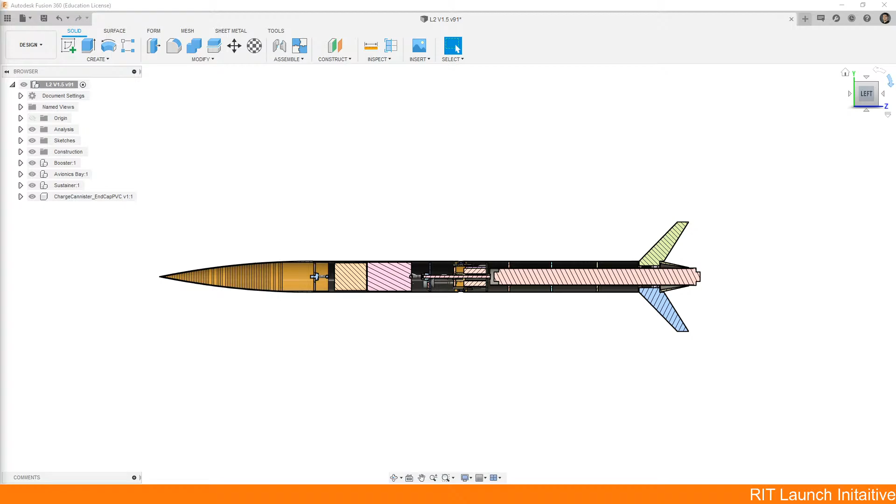So to start with, let's do a quick review of what this rocket is. Lightwave 1 was a single deploy Level 2 rocket that would fly to 12,000 feet to test out new experimental live stream camera systems for the team. Since the live stream cameras are the main focus of this rocket, there's a very large avionics bay in the center, and a lot of design practices had to go into getting it to work properly.

So if we go back to the section analysis view, let's work through each section of the rocket one at a time, starting with the nose cone.

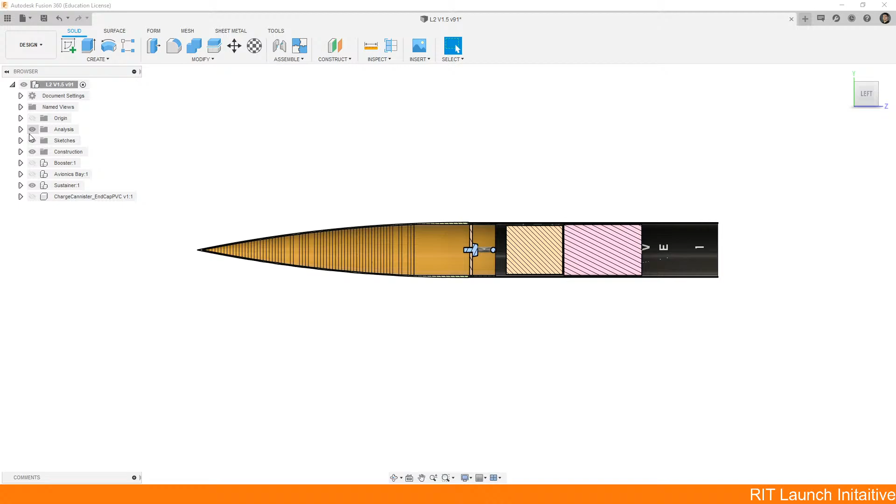The nose cone itself is not something I designed. This was an off-the-shelf part, and I only had to replicate it here in Fusion. If you didn't know, you can export nose cone geometry as a PDF or SVG from OpenRocket to then import into Fusion. That's why you can see this nose cone is made up of a series of small interconnected straight lines revolved around a central axis. This is not ideal for actual manufacturing. If you were to actually manufacture it, you'd want to do a fit point spline along all these points in the imported SVG, but as a visual representation and for renders and animations, it's more than good enough.

So let's go ahead and hide that nose cone. Inside the nose cone I had a bulkhead, an eye bolt, and a nut. This is a common attachment practice — you'll see this in pretty much every rocket's nose cone that doesn't have a solid sealed bottom.

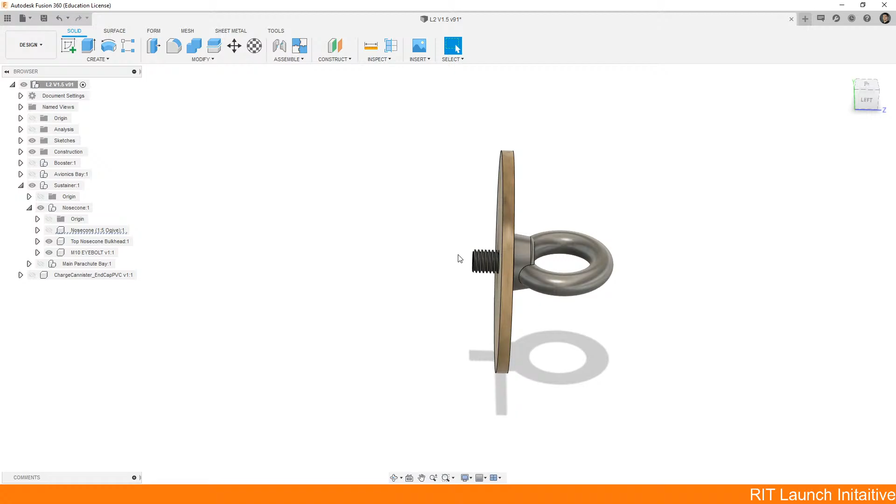This technique of just putting a floating bulkhead in is a lot harder than CAD makes it out to be. If we turn back on the nose cone and the section analysis, you can see there's not much actually stopping this bulkhead from moving backwards in the nose cone. So when I went to glue this up, if the fit and dimension weren't perfect, what ended up happening is this bulkhead would either sink back another few inches into the nose cone until it hit the taper, or it would bend and deflect and not be straight up and down, which can lead to unequal loading during deployment forces.

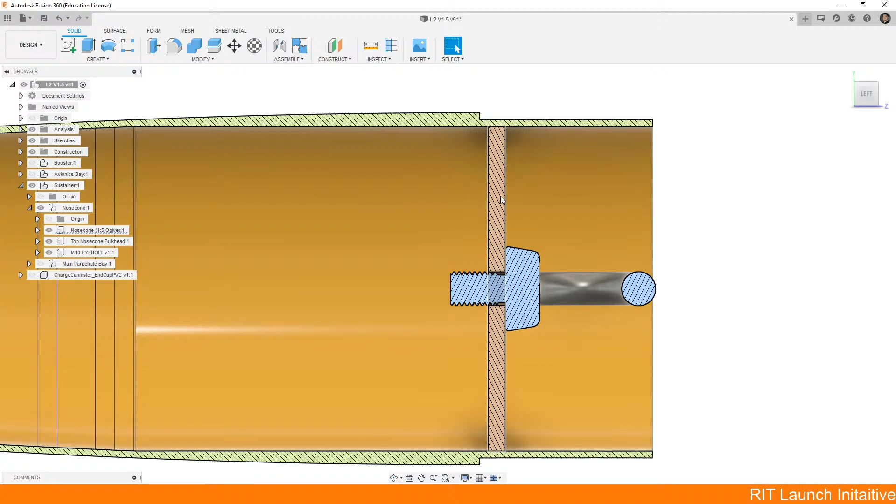So if I were to remake this, I'd probably make this a much thicker part, maybe out of a 3D printed material, that gives me a much larger cross section so it's less likely to bend or bow. I'd also like to potentially add some sort of locating edge on it, so maybe in the future I'd move this entire bulkhead up 4 to 5 inches into the nose cone so I can use the natural taper of the nose cone to locate that bulkhead.

The other downside of this design is that I permanently glued this bulkhead in place, so I'm not able to put any counterweights or future payloads inside of the nose cone if I wanted to.

The eye bolt and the nut, which is not modeled here, are just commercial off-the-shelf parts. There's nothing really special or interesting about those.

One thing I would change, not about the design itself, but how I would assemble it, is I would attach the eye bolt and nut to the bulkhead and secure that with epoxy before moving the entire bulkhead into place. I had just put them together with normal friction, like you'd normally attach a bolt and nut, before installing the bulkhead. So I had to inject epoxy in and around the eye bolt to get it solidly secured. Again, if it was a removable bulkhead, that would have solved that issue as well.

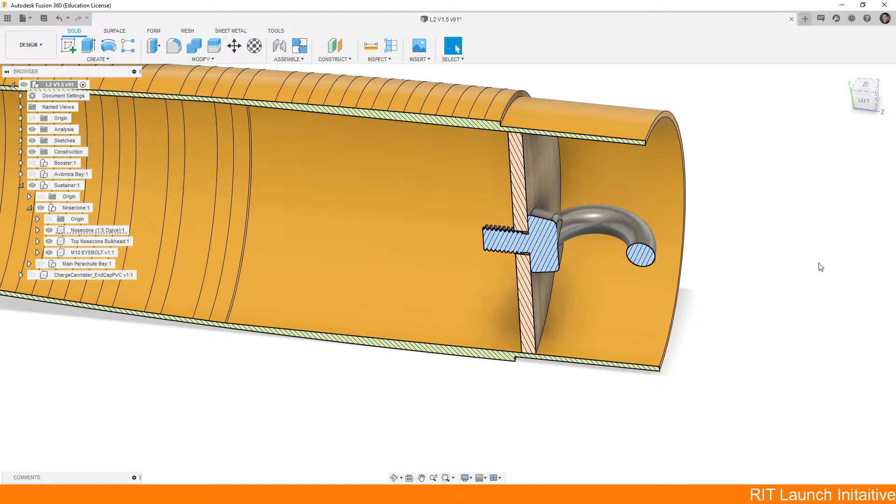Now we can move on to the parachute bay. There's really not much to say about this. It's an off-the-shelf tube with 2 parachutes in it. From a manufacturing and assembly standpoint, it can't get much simpler than that, so I think we're all set there.

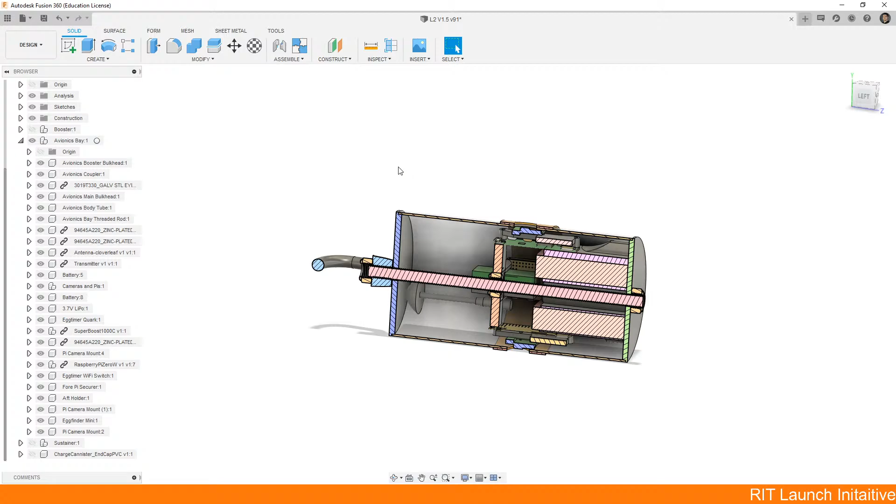One thing you'll notice is there's no connection mechanism to hold this to the parachute bay or the booster below. I ended up just drilling 4 bolt holes through it at random once I put it all together, which in hindsight, now I don't know exactly where those holes are in CAD when I want to remake parts, and the holes aren't at a perfect spacing, so I can't just rely on some pattern and rotate around them. In the future, I'd probably want to design and machine out those holes using CAD rather than just freehanding them.

To give you an example, now I don't necessarily know if something like this part of the avionics housing, which comes very close to the coupler tube, will fit, since in the real rocket there might be a bolt and a nut there.

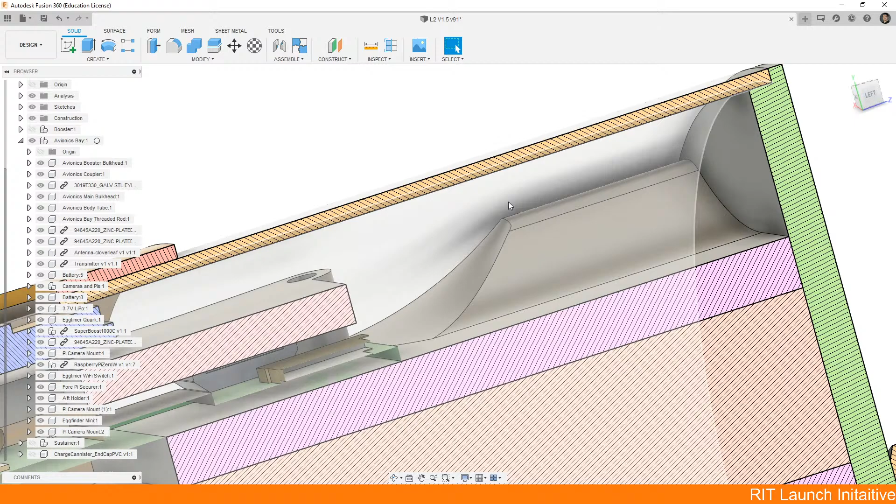For retaining the bolts, I originally had just threaded them through the body tube, but I found that actually 3D printing a block and then putting a nut in the back of that block works best. You can see an example of a similar design right here.

Normally what you'd do is just put a nut against the inside surface of the tube and epoxy it there. The thing is, that doesn't get it to sit perfectly flat, so it's better to 3D print a small block like this that has the curve of the inside of the body tube or nose cone already made into it, and then just a recess that will hold the nut in place. This also gives you a better contact area when gluing down the part, and can make manufacturing and assembly a lot easier.

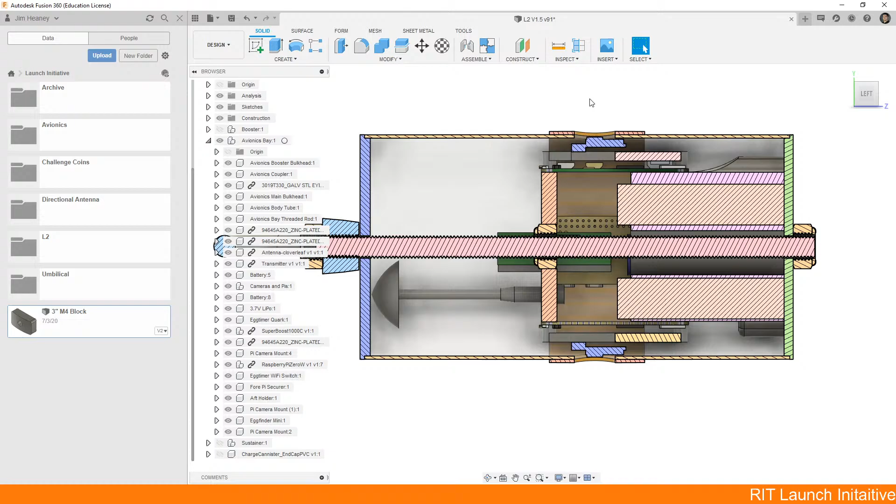Moving back to the Avionics Bay, currently it's configured for a payload of 4 Raspberry Pi cameras, one of which is live streaming over a 1-watt antenna. It also has an Eggtimer Quark for its deployment, and we can't see it in this view, but there's also an Eggtimer tracker, or Eggfinder I believe it's called, and an Eggtimer Wi-Fi arming switch to turn on and off the Avionics Bay.

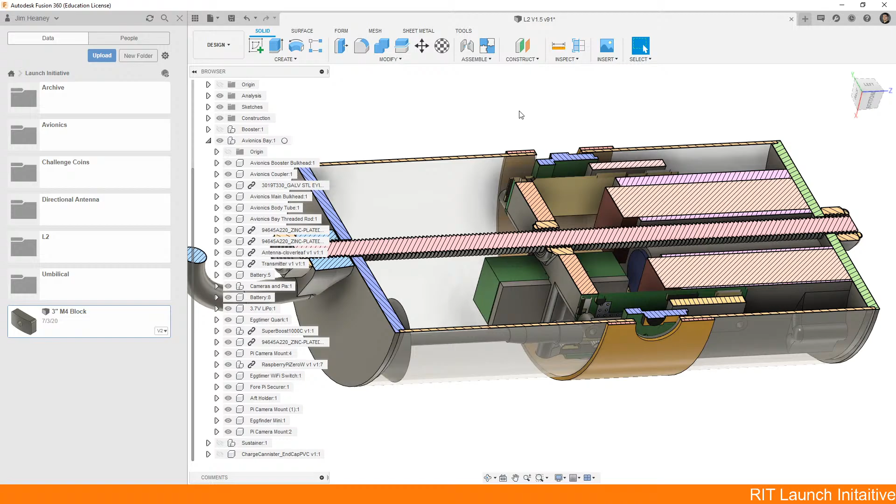These cameras and radio systems take a lot of power, and since the rocket would be flying so high and far, there was a concern over the batteries dying mid-flight or when downrange, causing us to lose tracking. So you can see there's quite a few batteries in here. We have 2 very large 2S batteries and 1 traditional 18650 3.7 volt LiPo.

Batteries are something a bit tricky with rocketry, because ideally 1 large battery is better than multiple small batteries from a cost and density standpoint. The challenge is you can't really run everything off 1 single battery. So for example, with this setup, I had the avionics and tracker running off 1 2S battery and the transmitter for the video running off the other. If I had combined both into 1 battery, there would be a concern that if the transmitter was drawing more power than expected, I wouldn't be able to find the rocket because it would completely drain the power that should have been used for the tracker and radio system for telemetry.

The downside to multiple batteries is they're a lot harder to place in three-dimensional space and take up a lot of room if you're using a traditional 2D sled for your Avionics Bay. I tried experimenting with a three-dimensional sled where parts are held in 3D space at different points with this Avionics Bay, but ultimately I wouldn't recommend it for something like this.

Our first problem with this Avionics Bay, now that I've gone through the whole design process and tried to squeeze all these parts in there, is that this is way too much stuff. If you look in CAD, everything looks like it fits nice and snug. You've got plenty of gaps between parts, there's spacers, nothing touching the threaded rod, it's all great. The challenge is you sort of lose a sense of scale when you're designing.

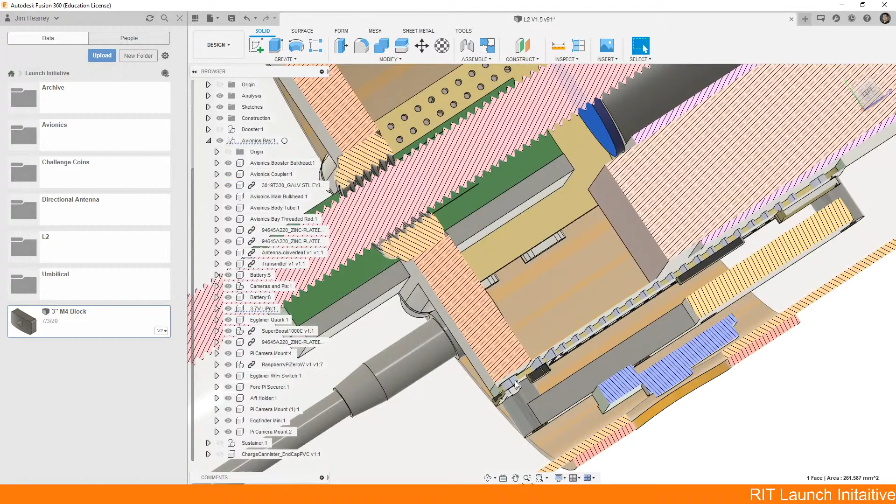These spacers look great and all, until you realize they're only about 0.5 millimeters. So now you're dealing with very small parts, you have to go in there with tweezers, you have bolts that are insanely tiny, and getting dimensions for the bolt holes with a 3D printed floating sled like this is very difficult.

So really the first thing we should have done is not have this many parts in there. That comes into the DFA aspect of this. You really need to know what parts you need for the mission and then design the rocket around it, or know the constraints of your rocket and design the mission around that. For this size of Avionics Bay, since it's already built and I can't modify it, I'd probably want to reduce the scope down from 4 cameras to 1, and maybe decrease the size of the transmitter for the video from 1 watt to 600 milliwatts.

Cutting the power of the radio also significantly decreases the size and complexity of including the radio in the rocket. The downside, of course, is that we wouldn't have 360 video from this rocket, and the video feed would get cut off sooner, whereas this one might be able to survive up to apogee and get a good amount of the descent. We might lose a 600 milliwatt signal about 5,000 to 7,000 feet up, and then regain it on the descent.

If I wanted to focus on getting the 360 video and didn't care about the live stream, taking out the antenna and radio transmitter and replacing these Raspberry Pi cameras with a commercial off-the-shelf small camera like an SQ12 would make this entire assembly a lot easier. The Pi cams, while fairly cheap, are extremely delicate. There's a very thin ribbon cable that can only be connected and disconnected a finite number of times between the camera module and the Pi. So if you need to modify things or move things around too much, you end up breaking stuff. It's better to use a self-contained module and pay the few extra dollars than have multiple broken systems.

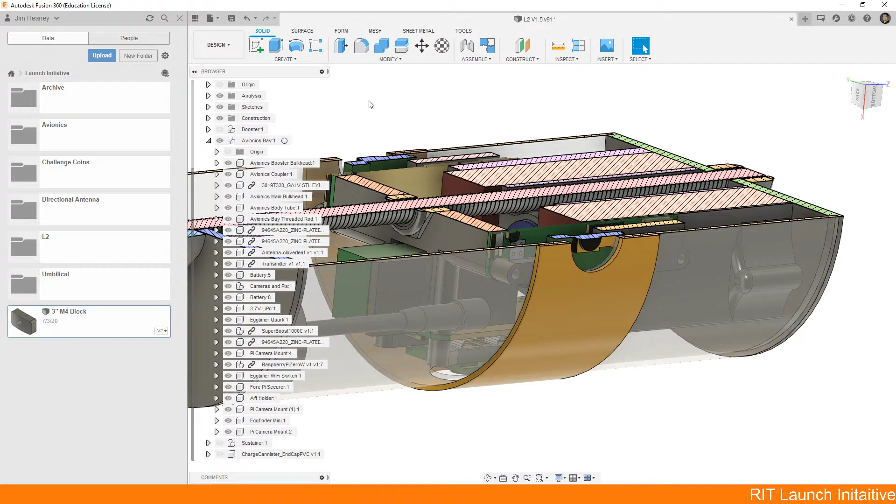So I would start, if we were going to retool this rocket, by getting rid of the antenna. Let's turn off the analysis so we can see everything we're doing. I'd get rid of that live stream antenna — it's just not worth it, we can't fit it in this rocket. Let's focus instead on getting that 360 video.

The Eggtimer Quark, we obviously need that, can't get rid of that. This sled was designed to be 3D printed and would hold the top of the Pis, which we won't need anyway. But let's isolate that part and take a look at the design and what could be improved on it if we wanted to use it again.

So this part was to be 3D printed. What's good about it is I used the fact that there was a threaded rod running through the entire length of the Avionics Bay to retain this part of the sled by just securing a thread lock nut, or nylock nut, in the center of this sled. I was able to constrain this piece in all 3 axes.

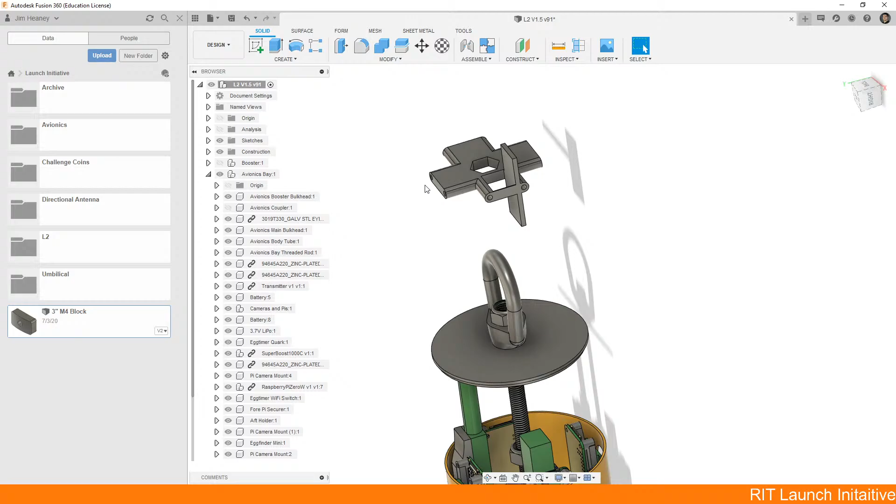The downside with constraining things on a threaded rod, especially with multiple components like this half of the sled and the other half, is that you need to be careful of the thread alignment, or make all the parts locate concentrically. In this case, this hole here, here, here, here, all the way around needed to exactly match up with holes on the Pis, which are also retained by the lower sled.

But since I didn't take into account the thread pitch and the distance between the nuts that would work properly, those holes never quite lined up, and I ended up having to shift this entire sled up and down on its nut. You could also get around this by just making a single piece sled and having multiple nuts underneath it to support it.

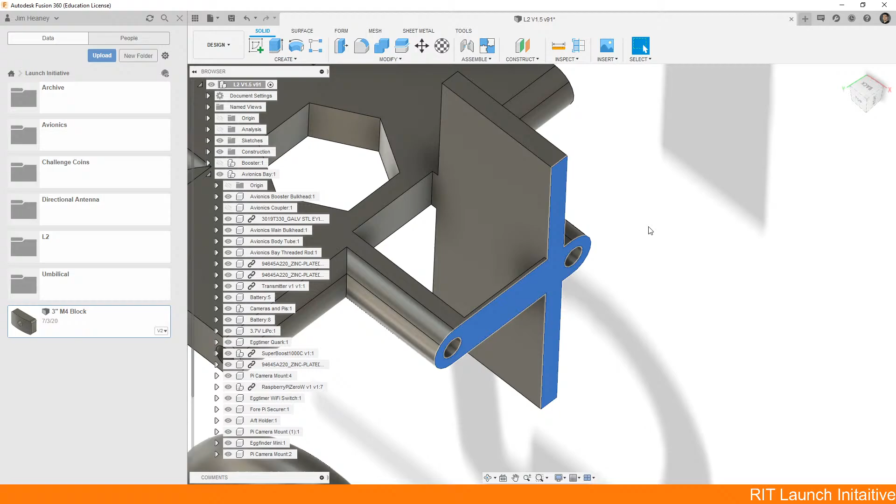Matt in the chat mentioned another challenge: the actual orientation of printing this part. This part was definitely not optimized for 3D printing. There's no great way to position it. You have this very thin feature perpendicular to another thin feature, perpendicular to a bunch of bolt holes that, if printed anything except straight up and down, won't be an accurate size and your bolts won't fit.

Something like this, if you needed this approach, could probably be done easier in 2 to 3 parts—whether laser cutting this part and printing the rest, or printing it in multiple parts that come together around the hex nut in the center. But for now, we're just going to get rid of that altogether.

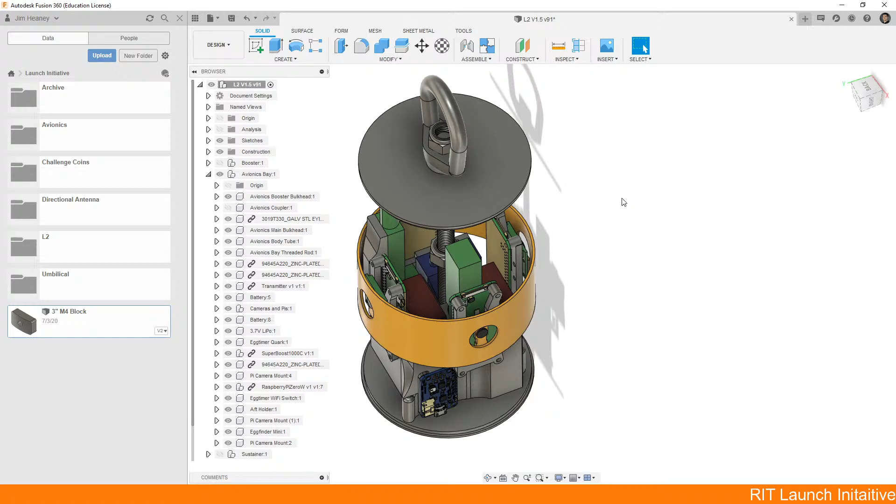The SQ12s I mentioned earlier, what's nice about them compared to the Pis is that they're a smaller cube, easier to retain no matter where you are. Let's keep going and see what else is wrong with this.

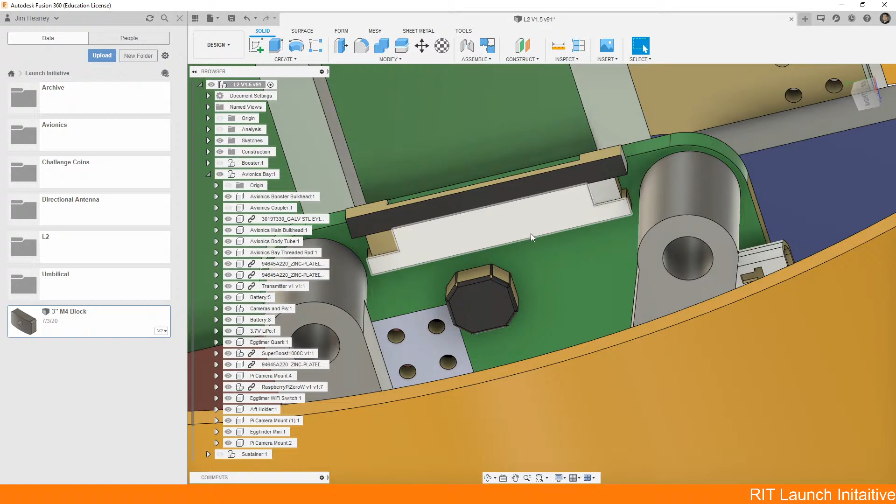You'll notice some components, like the Raspberry Pis, are a lot more detailed than the Quark and the Egg Finder. Some components have commercially available or free-to-use CAD models that are very accurate, which helps a lot with DFA. With these Raspberry Pis, I was able to design parts that come in very close to the connectors and physical parts on the boards to ensure everything fits properly. Of course, you need to worry about the accuracy and dimensioning of these CAD models when you find them, but if available, it makes the DFA process a lot easier.

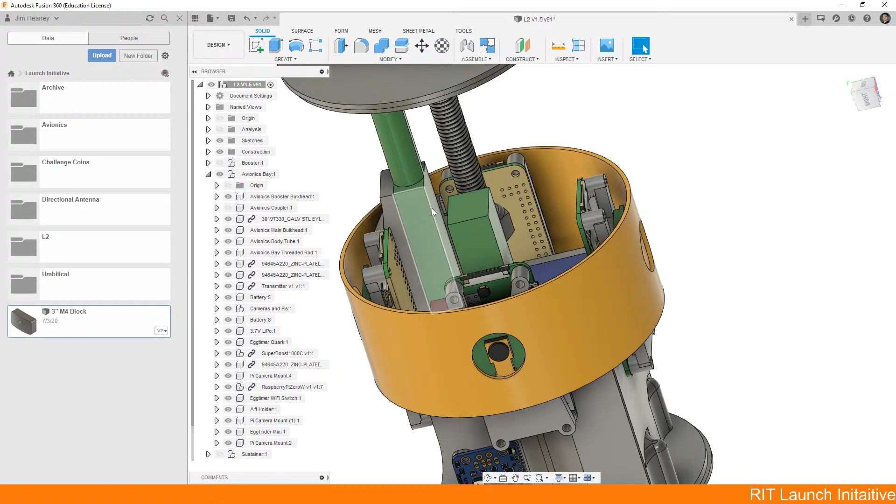The Quarks and Egg Finders, on the other hand, don't have any commercially available dimensions or CAD models. Instead, you either design them yourself, which takes a lot of time, or use this bounding box or black box approach, where you make a basic shape covering where the part would sit in general. Maybe there's extra space, maybe it's not totally indicative of the final shape, but you know that if no parts go into this box, that part will fit in here.

The downside of these is that there's no mounting. So if we look at the Egg Finder's box, all it is, is a solid cube. The Egg Finder itself does have bolt holes on it, but there's no way to locate those bolt holes in CAD.

As a workaround, I thought I could just hot glue these down to the sled underneath and wrap a zip tie around them, which might have worked with some other systems, but the Egg Finder and Egg Timer products use voltage regulators that run very hot. You need to take that into consideration when designing parts around them. Of course, it never says that anywhere in the documentation, so it's something you need to find out experimentally by testing your parts before implementing them.

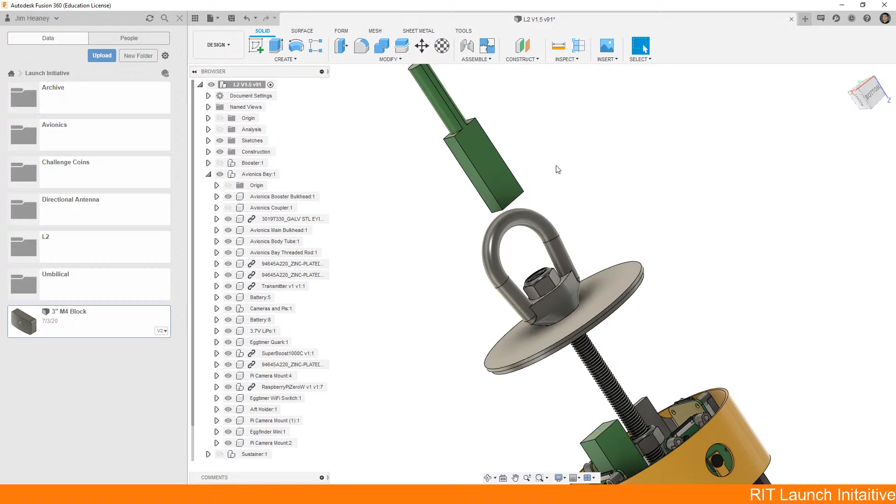If I were to do this again, I'd probably go through and make a couple revisions to the sled to figure out the hole positions on the Egg Finder and Egg Timer. Another approach you could take is to print a solid blank slab underneath this component, and once you have the part aligned how you want, drill the holes through and mark them in real life. This is also a good approach for custom components where you don't necessarily know the exact dimensions. So we're definitely going to keep the Egg Finder in there.

Let's hide this top bulkhead and everything, and we'll hide the external body tube.

So like we said, we don't want Pis anymore—let's just get rid of all of them. Since they're such complex models, it's going to take a while for all of this to process. And this one does not want to disappear. There we go. So let's see what we're left with.

Down here we have the power boost. This was used to convert the 3.7 volts from the LiPo up to the 5 volts that the Pis needed to run. Power boost is a simple, commercially available option for converting power.

Thing is, a lot of avionics already have a built-in voltage regulator we could just tap off of, and this board is a lot bigger and more complex than the actual voltage regulator itself. We could get a commercially available step-down voltage regulator that would take up probably one-eighth the size and cost about one-tenth the price. The advantage to these Adafruit breakout boards is that they do have very accurate CAD models with mounting.

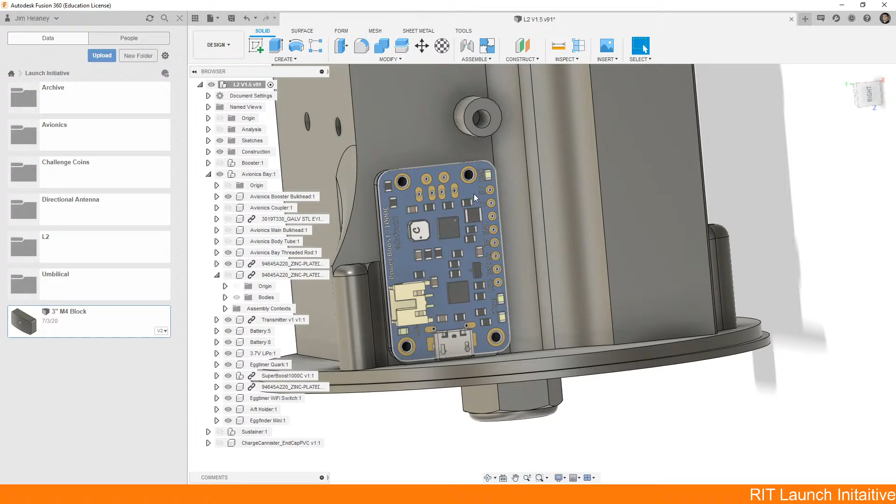So if you're doing something very complex with multiple boards, sometimes these are beneficial. For what we're doing though, we really want to save money where possible and simplify the assembly process, so we're going to get rid of that.

Now with those other cheaper alternatives for voltage regulation that I mentioned, we run into the same problem that we did with the egg timer products: there is no easy and accurate dimensioning, especially for mounting holes, if there's even mounting holes on the parts themselves. Many of them are just designed to either be mounted inside of a PCB or floating free in space. So we need to come up with some mounting practices for those.

A common one is glue or epoxy, preferably not hot glue since voltage regulators can get very hot. But it is an approach you can use for something with very low power consumption. Another approach I've seen is people will sometimes wrap them in two axes with zip ties, and that's a happy medium between the two approaches since they are temperature resistant, reversible, and don't necessarily require accurate dimensions on your part. You just need to generally know the length, width, and height of it.

Now that we've gotten rid of the recording systems, we can get rid of two of the batteries and the transmitter for the video.

Another advantage to using these SQ12s that'll help to further simplify the DFA process is that they are completely self-contained units. So we don't need an external memory card, we don't need an external battery, we don't need an external power connection. You just hit the button on the top and they work.

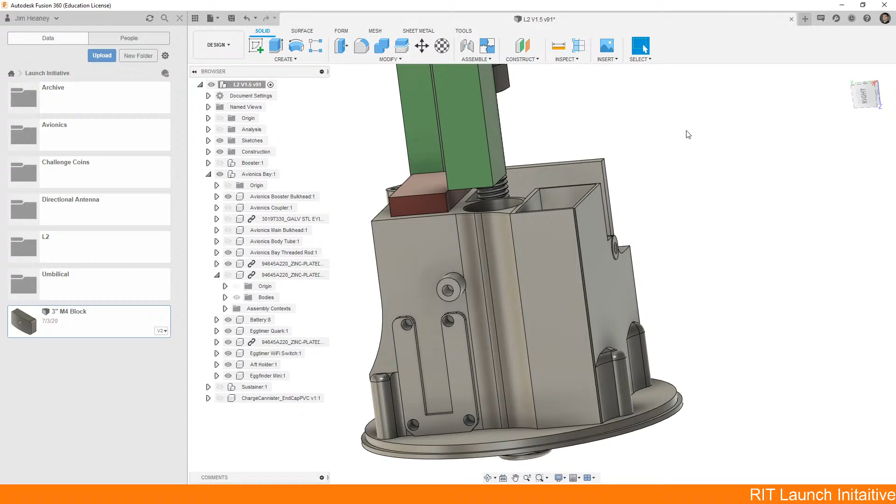Using those four pre-assembled camera units would simplify our launch operations procedures since we now only need to worry about one battery instead of two to three.

So now we can get rid of this mess of a sled, but first let's pull it out and take a look at the design practices for it.

This is another example of a part that was designed to be 3D printed, but it's not great. See, 3D printing is a bit of a double-edged sword when it comes to DFM, in that 3D printing can make pretty much any geometry and it won't complain. If I give square corners to a mill, it won't work. But if I give them to a printer, it will do it. It might not be as good as I want, but it'll definitely do it. That though sort of lulls designers into a false sense of security that anything they can make in CAD can be 3D printed, which is not always the case.

You need to give special considerations for support material, hole sizing, and other things like inserts. So inserts are a great piece of technology for DFM that I used on this part that I should have used on that other one we saw earlier.

When you're trying to thread a bolt into a 3D printed part, unless it's a very large diameter bolt, like over one inch, you can't accurately model the threads. So what most people do is they undersize the hole slightly, and the first time they drive in the bolt, they do it with a very high torque Allen key. What this will do is the bolt will actually cut the threads into the inside of the plastic. This is an okay approach for some applications, but the issue is it requires a lot of material around the bolt hole that needs to be very well reinforced to take those cutting forces.

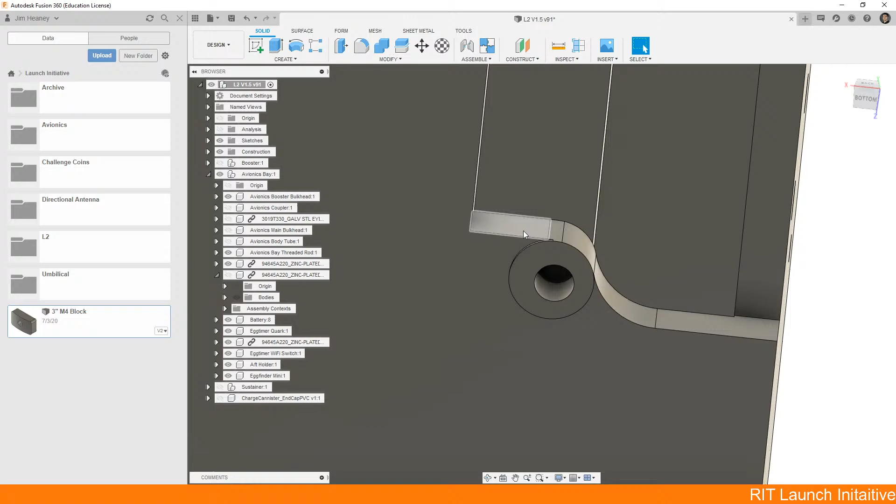There's also the concern that if you have a hole that's too close to the edge, like this one, when you're using a threaded insert, the heat will deform the shape out here permanently, and the threaded insert won't be in there straight.

But if you take all those into consideration, threaded inserts are really a great way to make your 3D printed parts work a lot better. They're just as strong, if not stronger, than the surrounding plastic when it comes to thread strength. It gives you a much easier approach that's nicer to use than trying to force the threads in yourself.

So let's take a look at some other aspects of this. One of the good things about this part is if we move it away from the rocket, you'll be able to see it better. The part is more or less a 2D profile, so when we print it, all of these walls are going to come straight up out of the bed, so they won't require much support material.

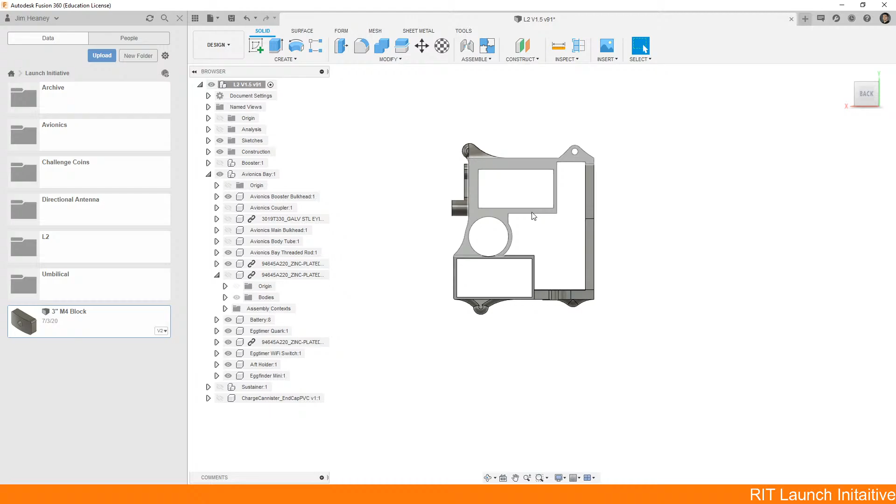Also, when the printer is moving just in the XY space with no support material, you'll generally find that your dimensions are going to be more accurate to what they are in reality. Of course, they're not really accurate.

If we had to get a snug fit on a battery, for instance, this is where the 2S LiPos would fit—you can see I modeled the rectangle to be 35 millimeters across. The LiPos in reality are about 30 to 32 millimeters across, but to make up for the dimensional inaccuracies of the 3D printer, I oversized the holes.

There's no set rules when it comes to DFM for oversizing dimensions for 3D printed parts, since every 3D printer will have a slightly different performance profile for how well it can handle accurate geometry. It's best to be familiar with the machines you're using and then design based on a couple of tests you can do.

When I'm designing to use a new 3D printer, one thing I like to do is just set up a block with a bunch of pins in it, with varying distances between the walls of the pins and the pins themselves. This allows me to very quickly and easily get a feel for how accurate the 3D printer will be when it comes to tight tolerances.

For this application, I was 3D printing the parts on just a cheap self-built 3D printer, so everything was awful when it came to dimensioning.

This is one of the downsides to 3D printing from a dimensioning standpoint for DFM. When you go to have a part manufactured for milling or something, you don't need to worry about compensating for the accuracy of the machine or the dimensioning or anything like that. All of that is handled inside of CAM or the machine's cutter compensation itself.

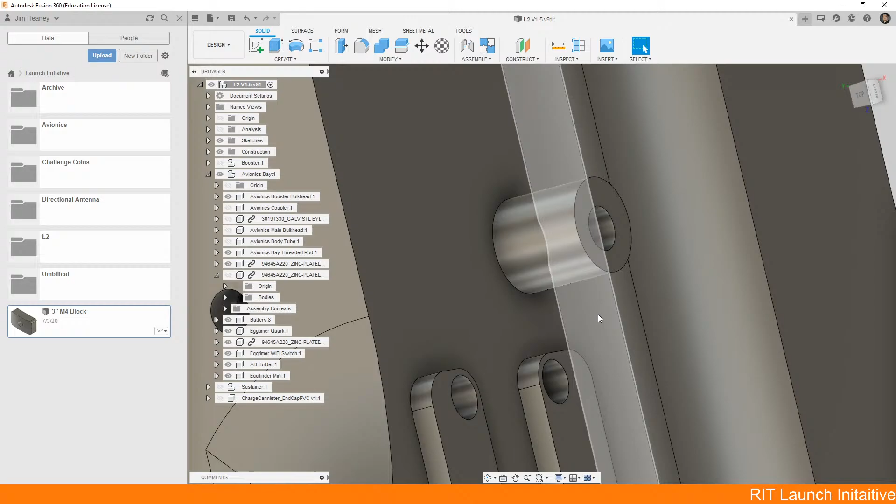3D printers, when they have free-floating geometry that doesn't have anything immediately below it, need to use support material. Now, support material is not necessarily bad. It will reduce the dimensional accuracy of the part it is directly supporting, but overall, it's not the end of the world. Something like this, though, is a bit of an issue.

If we look head-on at a cylinder that it had to support, the 3D printer does its support by drawing a series of lines up to the feature it needs to support. So we were supporting a rectangle, like this surface up here. Let's say there was another part up top—it could just draw a series of lines, and that would allow it to bridge the gap between them.

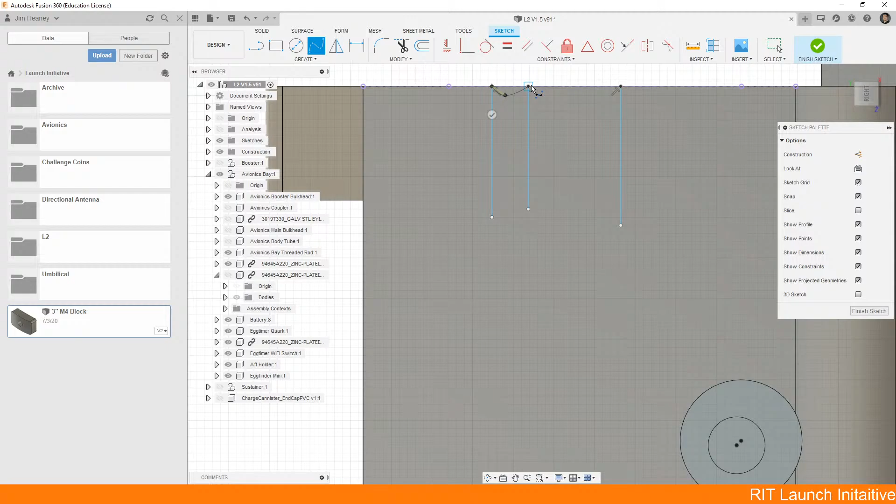So we might see maybe a little bit of drooping in the part. This is massively exaggerated, but overall it does pretty closely fit what you would expect from a flat part. Maybe touch it with a little bit of sandpaper and you'll be fine.

Now when we look at a part that has a curved bottom facing down towards the build plate, the support material will touch there, like we expect it to. And then it'll do one there, yep.

And it will do one maybe here, like that. Now the issue with this is it's only supporting the circle on an infinitely small point of material right there, and then it has all of this arc that it needs to build up in midair before reaching this next part. Not only are we now working against gravity, but the natural constrictive properties of plastic as they cool will cause that edge to curl up.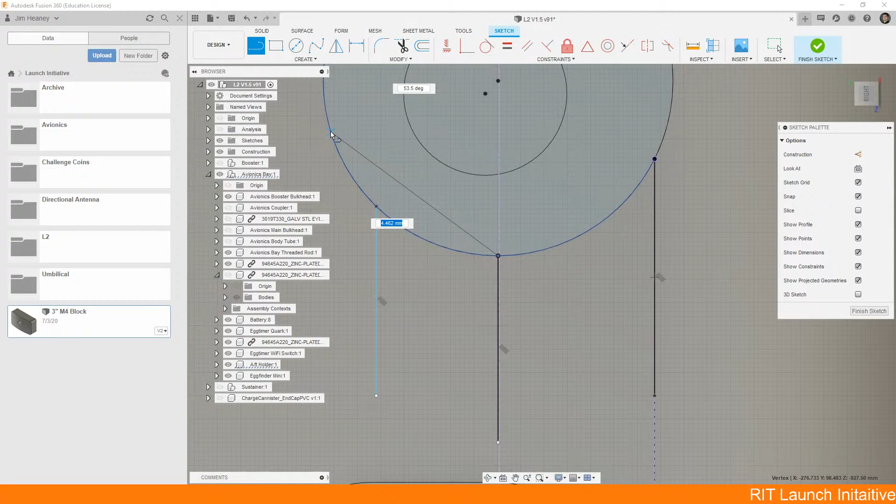So what may end up happening is this will be closer to just a rough edge, and the material that would have been here starts to get pushed up, and we'll start to see flats on the inside of the hole above it. So when you're designing parts that need to be supported, it's best to give them a very flat, broad base rather than a curve like this. I don't even really know why I went for a curve here. I think it's just because this was a standoff for a bolt, and I thought the bolt is round, so I'll make the standoff round.

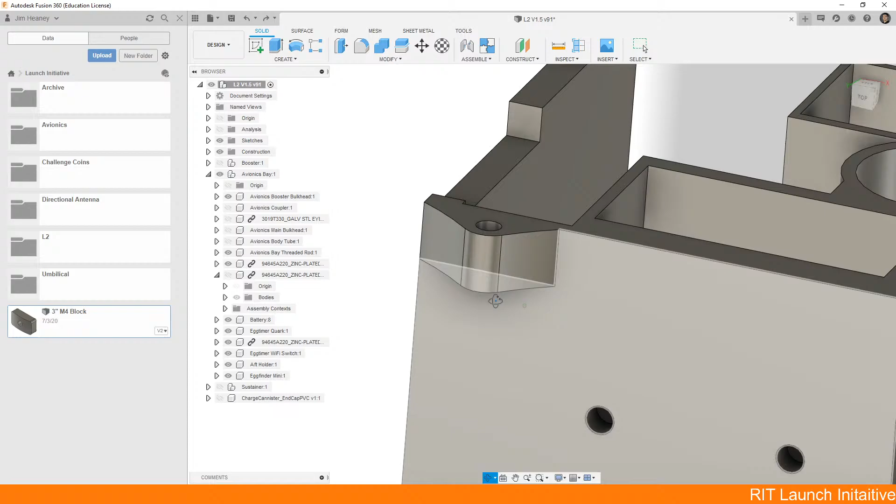So over here, this feature would be much better supported during the printing process. You'd see that it's very flat along the bottom, so when it goes to support it, we'll have much less deflection. Also, there's no critical geometry in line with the support material. This hole here, its dimensional accuracy won't be bothered much by any plastic that starts to warp or bend on either side of it.

So going around again, you can see the good. It's a very simple 2D profile. Where we need support material, it's a clean cutaway with a large flat base for supporting. The part has a lot of contact area with the base of the printer, which is good for helping it to stop from curling up.

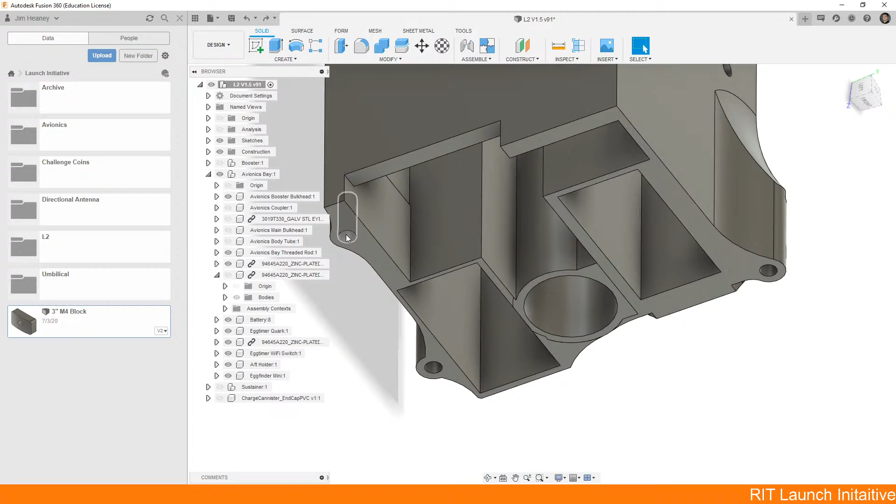These holes on the bottom, depending on which machine you use, might be a bit tricky. 3D printers is a bit of a crapshoot. About half of them, the features that are on the bed are the most accurate and best features of the print, like with a Prusa i3. But for other printers, like a FlashForge, the features immediately on the bed are the least accurate and the worst made of everything else on the part. So again, it really comes down to knowing what tools you're using when you're doing your DFM.

So this part, overall, it could use some improvement, but I would still print this and run it as is today with no major concerns. But we're simplifying, so let's get rid of it. Now, another part to look at that we're not going to change, but it's a good change of pace to go from 3D printing now to traditional machining.

Let's take a look at these bulkheads. So since there's going to be charge caps mounted immediately above and below, just above the Avionics Bay, we wanted them to be metal. You could probably get away with a very thick wood with a metal sheet coating on top, but I had aluminum plate stock, so I figured why not.

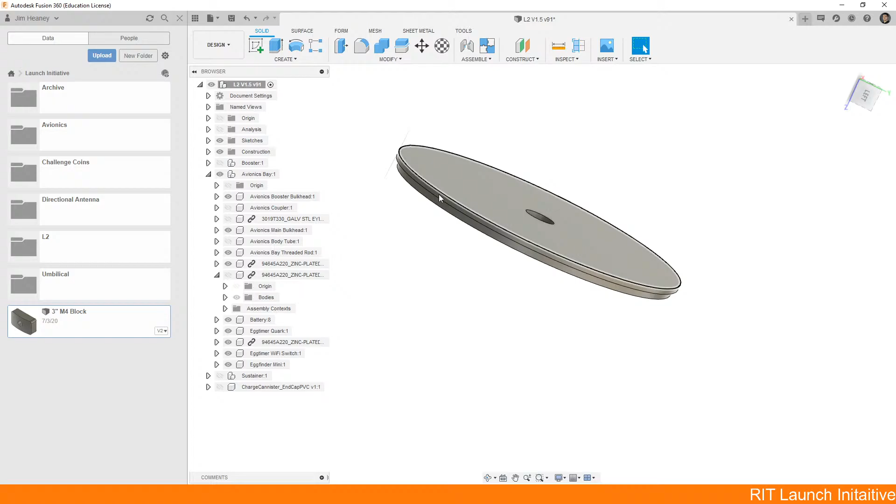The blanks were very easy to cut in the water jet on campus, since it's a very large, simple radius on the outside, and the inside diameter is very large as well. The water jet is like a laser cutter, but it can cut through metal or pretty much anything else. The downside is that it can't cut precisely on both sides.

So if I had this circle, which is a diameter of just under 100 millimeters, and I had the plate that it came out of, the plate probably has a hole that's like 120, 130 millimeters in diameter, and the edge is all jaggedy and broke. Same with the inside hole here. If we took the piece of material that was in here, that was cut out, it probably just looks like a random shard of aluminum rather than a clean cutout that you would see with a laser cutter.

So one important thing to note about this is, just to keep everything simple, the thickness of the plate is not the nominal size of the stock. So if I change the document settings from millimeters to inches, we can see that this is 0.186 in CAD. Now that doesn't really match up with any nominal plate thickness.

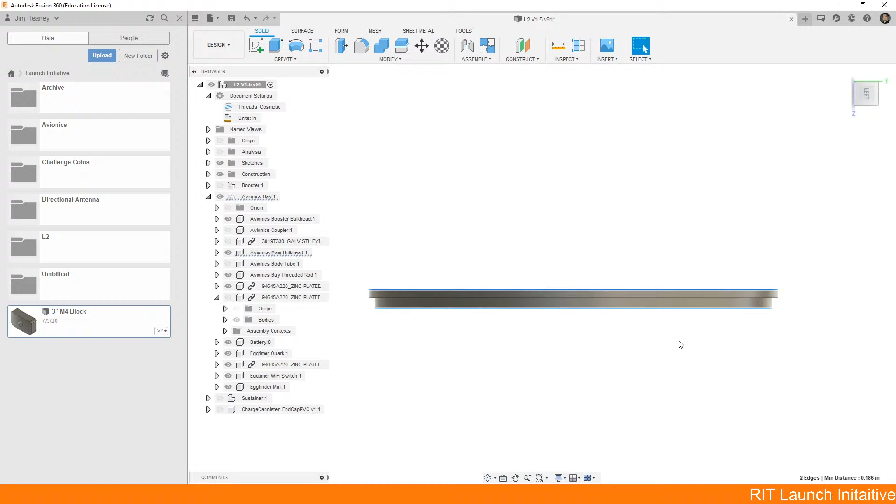It's possible that I found some odd gauge material, but if I remember correctly, what I actually did was I got some quarter-inch aluminum, and then in the dimensions I marked out that only this dimension was critical, from the base of the lip to the top of the lip, and I didn't really care how much material was above the lip, since that's just sitting in the avionics bay, or in the parachute bay anyway.

Just for accuracy's sake, if I was to do this again, I would probably model this to the size that I would want, rather than doing some weird dimensioning on the final print.

Now, speaking of dimensioning, when I designed this, I designed it for a nominal tube. So the nominal tube was this one here, which I said had an internal radius of 1.894, and this part had a radius of 1.894, and I called it out as plus or minus 10 thou.

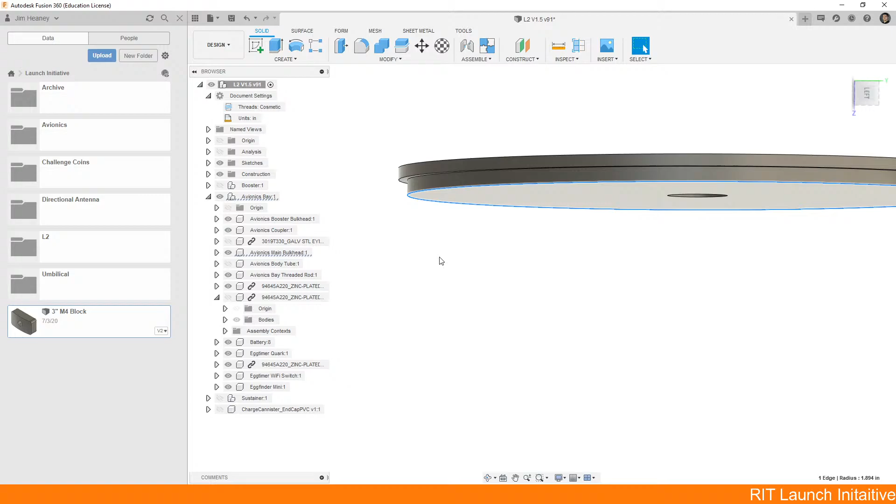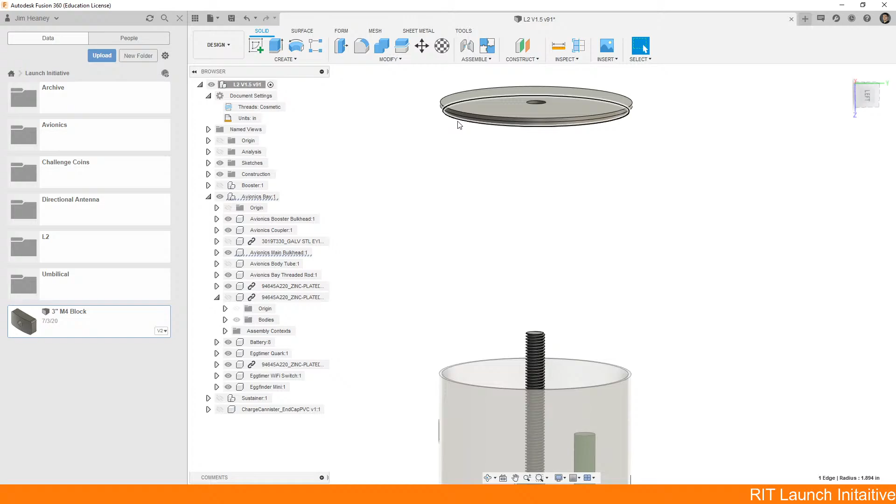Now, there were two main failures there. The first is the tubes themselves have a tolerance of plus or minus about 10 to 20 thou on the inside, depending on where they are in the wrap and which batch they came from. The other issue is that since these parts need to fit together, telling the shop that they can make this part plus 10 thou instead of, say, plus 0 minus 20 meant that they could design this part and machine it to be oversized already.

So when I got this part, it didn't fit, wasn't even close. I could have tried to sand down the inside of the tube, but that would have significantly weakened the structural integrity. So instead what I had to do was put this on a lathe and turn this step down a bit more, as well as this to fit inside the parachute bay.

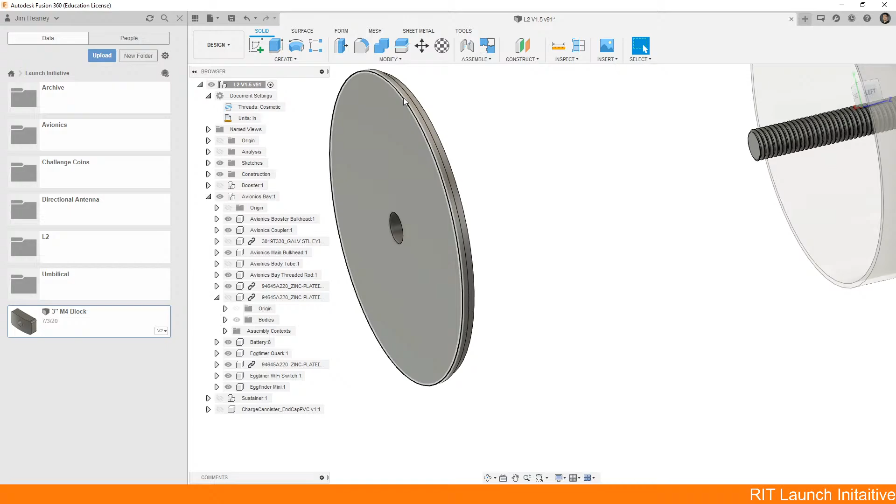The challenge is, how do you hold this part? You have to spin it, there's no identifying marks, this is way too thin to hold on to with a chuck, especially if we needed to machine those features. So I ended up having to squeeze it between two nuts on a piece of all thread that I held in the chuck. This is far from an ideal work holding solution, and it led to a lot of chatter and inaccuracies in these parts.

I eventually did get them to fit, but it was a multi-hour process just trying to shave off that little bit of metal.

If I was to do it again, I would probably want to do a composite bulkhead, where instead of trying to cut this weird step, which would increase the number of machining steps, so we have to go from the water jet to the lathe and then fit check and back to the lathe, what I would instead do is split it into two parts.

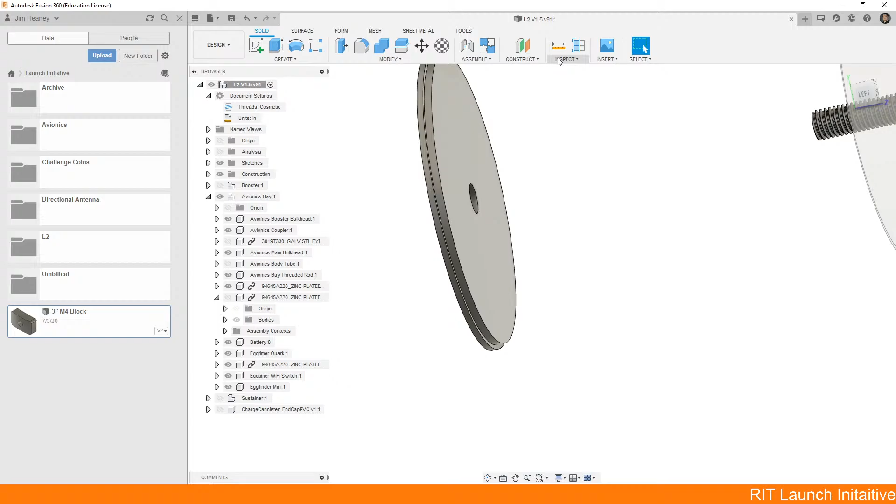So now I can send the shop a thinner piece of stock, and I can tell them I want a circle of this diameter with this hole size, and a circle of this diameter with this hole size. Then I could just bond the two together with some strong epoxy in the middle, and I have functionally the same bulkhead, but with one fewer machining operations, which saves maybe hours or even days off the turnaround time.

And once I did the fit check, so I found something wasn't good, I can get each part individually remade, or just shave them off a bit easier, since we're now just dealing with a single part. I could hold it on the ID with an expansion bore or something, or even just put it on a jig and take it to a belt sander and spin it around to get that final OD into shape.

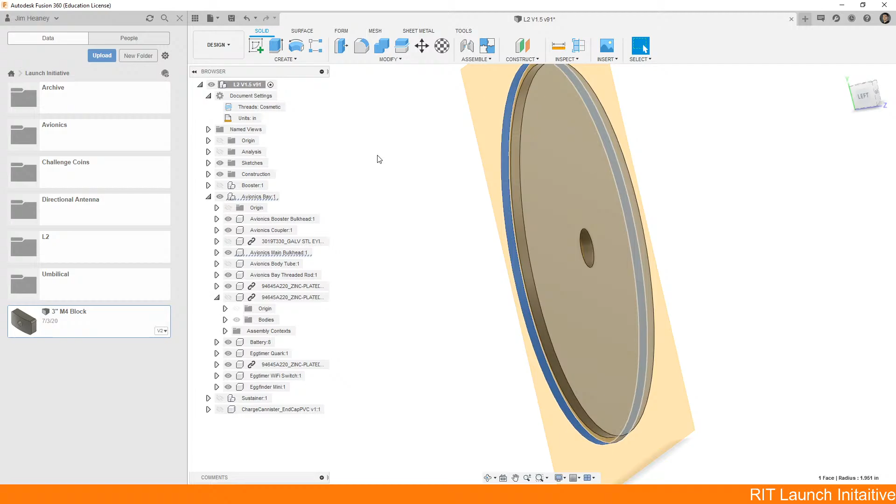Another good thing to have done would probably be to make a laser cut test fit piece. Plywood is cheap, and we can laser cut this bulkhead in a matter of seconds. So what I should have done is made this bulkhead out of plywood, tried to fit it to the tube, but realized that there's a tolerance stack-up issue, then go back and fix it.

The tolerances on these tubes are not great, so while you could try and do a traditional tolerance stack-up study to get everything working properly, I find that it's best just to do a little bit of trial and error and fit it based on the tube that you have.

If it's a machined piece like metal, where you have a much more accurate ID and OD control, then I think you can get away with a normal tolerance stack-up, which, if you're not familiar, refers to the idea of the nominal for this fits the nominal of that, but then how do I make it so that through all the possible ranges of tolerances, it will still work?

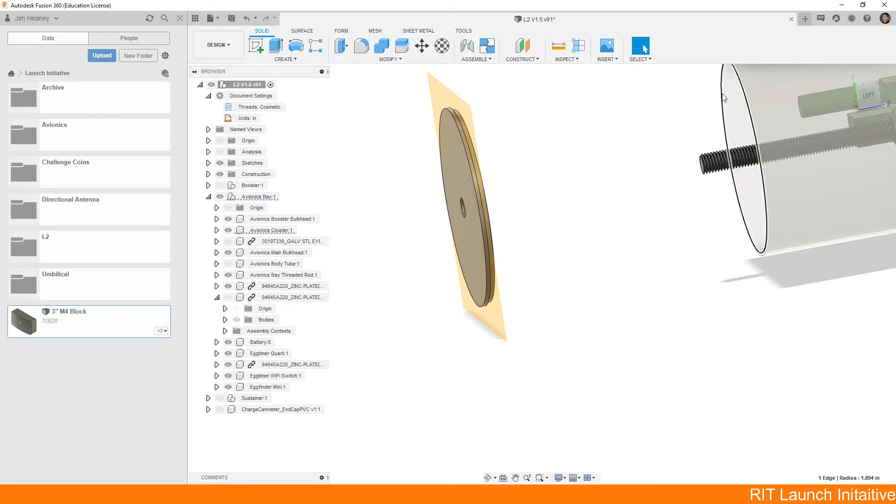So with two simple parts like this, the approach that you would probably take is to tolerance this part so that the diameter can be X plus maybe 5 thou, 10 thou, but minus 0. The machining parameters for this say that we cannot make that any smaller.

On the flip side, this part we'd say can be whatever the diameter is plus 0 - it can't be any bigger - and minus whatever tolerance we want to give it, 5 or 10 thou is usually common. Now the upside is, nominal fit to nominal fit, we know it'll be a nice, snug, perfect fit every time. But at the absolute edge of our tolerances, this one could be 10 thou undersized, and this one could be 10 thou oversized, so we'd end up with 20 thou of slop in the middle.

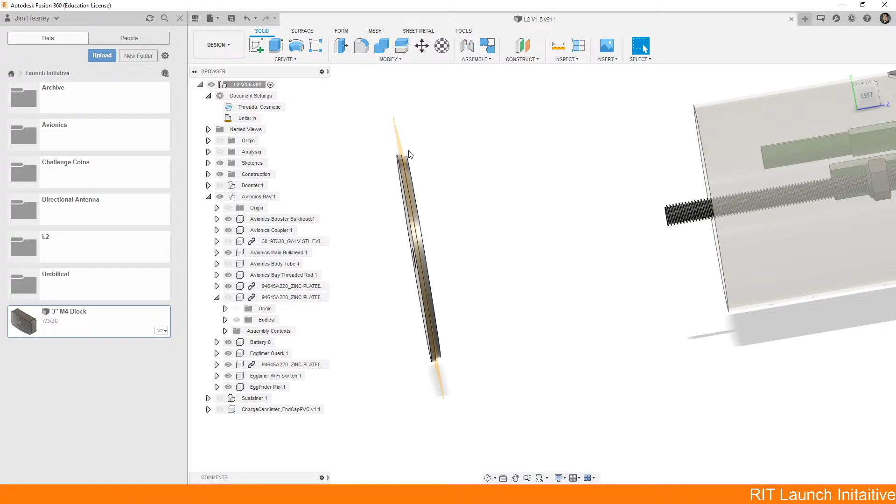So it's all stuff that you need to balance when you're designing and choosing your manufacturing practice. Or, for one-off things like rockets, the approach of getting close to nominal and then reworking to fit, like sanding or returning it, is good enough sometimes.

So another good thing on the bulkhead is if we look, this rocket has 2 identical Avionics Bay bulkheads. This goes back to the DFM idea that programming and setting up a part is about 75% of the work, so if possible, you want to use duplicates of the same part wherever you can. In theory, I could have made a more optimized bulkhead for the top than the bottom, but by using the same design on both, it saved a lot of machining time.

For example, what I could do to optimize it is have the shop pre-drill the holes in this top bulkhead that I'd need to pass wires through or to connect up the charge canisters. But that's all stuff I could do as a secondary operation pretty easily.

So now let's hide those.

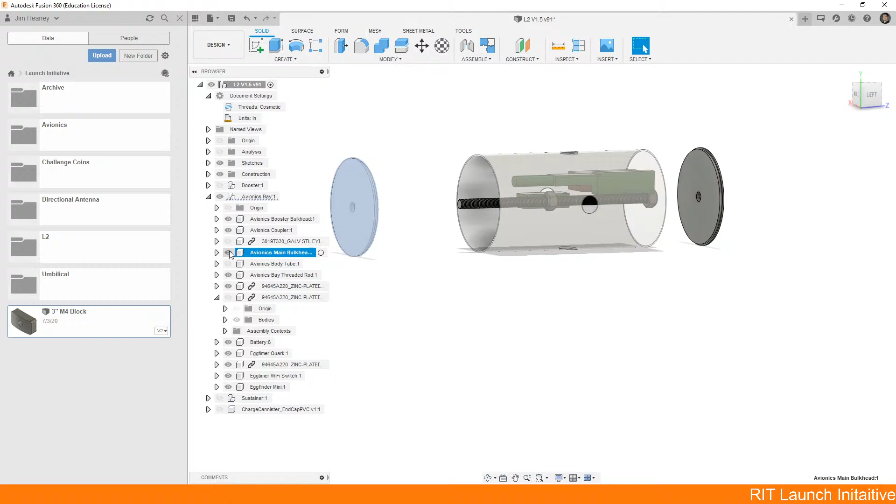The all-thread through the center of the Avionics Bay is a classic DFM and DFA practice. It's simple, reliable, and it'll take care of all the structural loading of the bay, so you don't need to worry about that when designing. So I would definitely still do that.

The nuts I used on the all-thread were all Nyloc, meaning they have a nylon gasket inside that hugs the threads a lot tighter as it's spinning. What's nice is they won't freely rotate and move along the threaded rod as they're vibrated. The downside is they take a lot more force to apply. So these are good for applications like rocketry, where flight forces can sometimes shake and vibrate nuts and bolts to the point where they start to unthread each other.

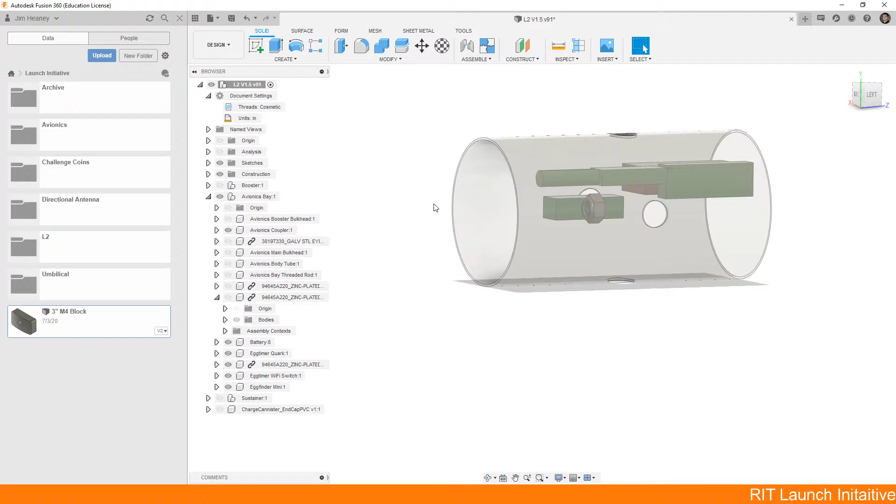It's not as good or as foolproof as something like safety wire or thread lock, though. So it's a good middle ground between easy to use and reversible, as well as giving you some resistance against vibration.

So let's hide that. Now all that we're left with in here is our Eggtimer Quartz, our battery, our tracker, and our switch.

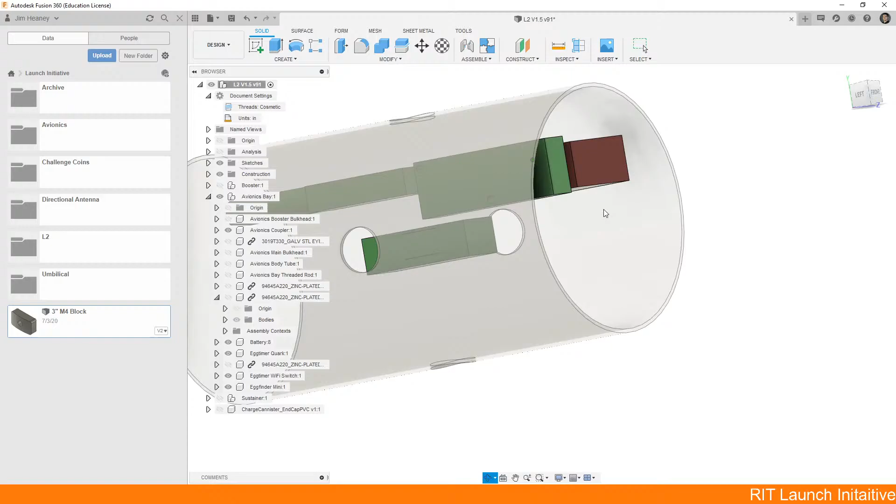On the switch, you can see I went through and did the work of locating the mounting holes inside the keep-out box, so now I can use that and mount it with screws. I'll probably go back through and locate the screw holes on all the other parts as well, so I can mount these all with bolts rather than glue.

Before we go into designing the internal of this bay, though, I want to talk about the outside, because if you notice, there's something special about its design. So if I open that - oh, there we go.

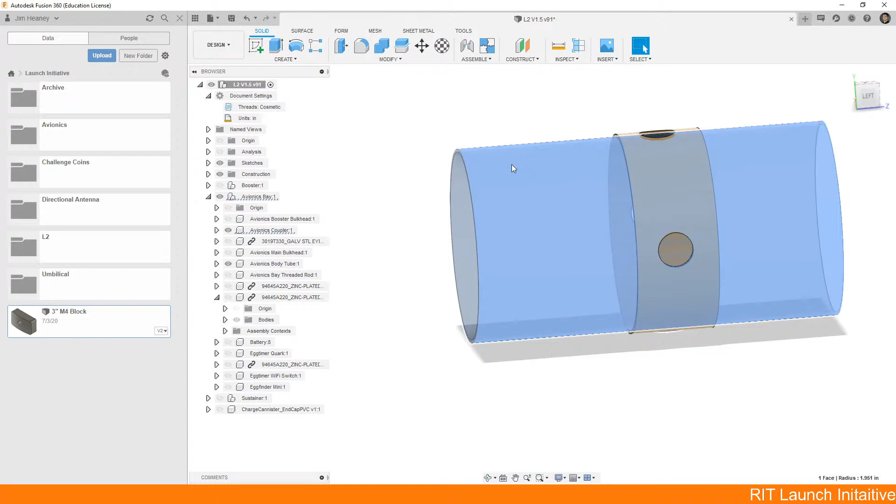So again, this is translucent just for demonstration. The actual part is just a blue tube coupler. In fact, I could switch that back right now just by doing that, and then by doing - let's make it blue. Oh, wait a minute, that's right.

So sometimes in some of my older designs, what I would do is change the physical material of a part to something clear like acrylic to get a better view inside of it. That's something I've seen a lot of other people do on their rockets and designs in Fusion in general. But there's a really good tool that not a lot of people know about, and it surprises me.

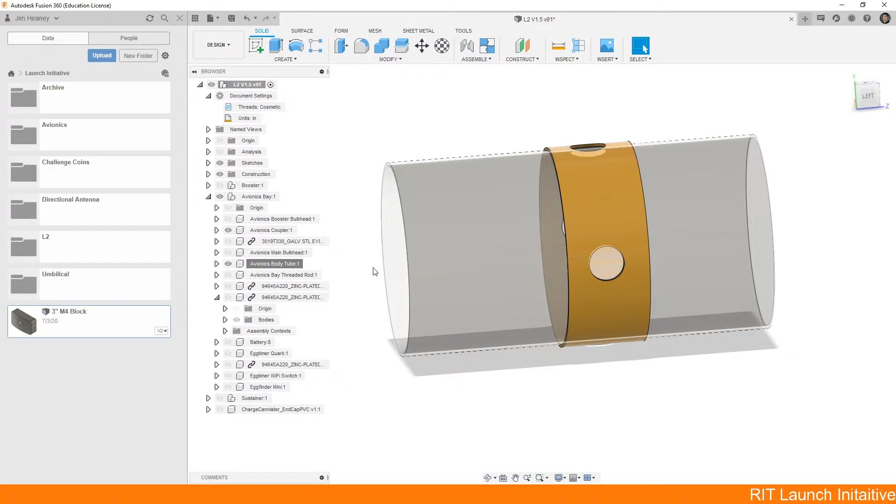If you go in your browser and right-click on a component, you can change its opacity, which will let you see through it a lot easier. So for the Avionics coupler, I don't really care what it looks like from the outside, so I could make it clear. I can even hide it altogether, but maybe I still want a general idea of where it is, so I can turn the opacity down to 50, maybe 30%.

Another thing that's useful in this menu that a lot of people don't know about is selectable/unselectable. Let's say I'm doing work on the coupler, and I care about this outside body tube, maybe I want to work underneath it, but for some reason I can't turn it off. I could set it to unselectable, which shows a little icon in the browser, and now I can select and do work underneath this part.

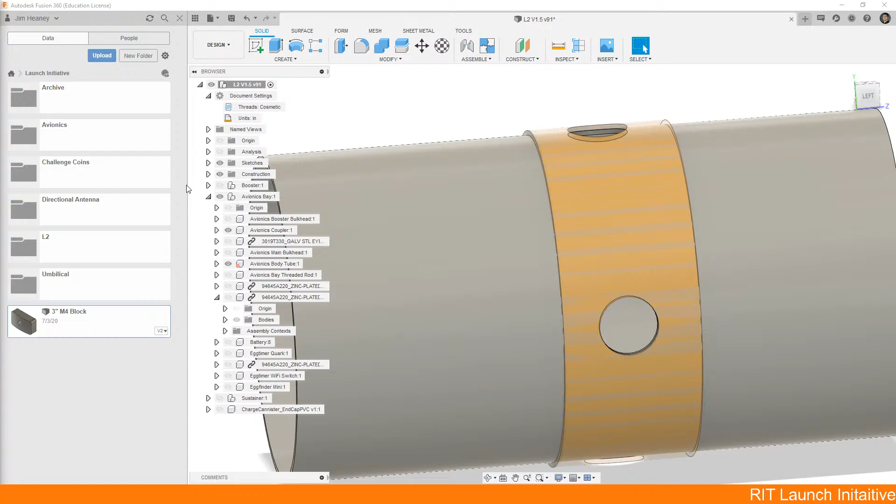It's like it's not even there. See, I can't select any features on it, but I can select the features underneath it and around it, no problem. And then you can just turn selectable, unselectable back on whenever you want.

You can also apply that to entire subassemblies or component groups. It's good for if you want to work on only one aspect of your rocket at a time. So if I want to work on the Avionics Bay, I could turn off the booster, and then set the sustainer to unselectable and decrease the opacity, so I can still get an idea of where it is as I'm putting stuff together.

Looking at this part, this is a surprisingly deceptive piece to manufacture. Normally the Avionics Bay on something like Charm is pretty straightforward. All it is, is the coupler tube cut to length, nice and simple, and a body tube cut to length, nice and simple.

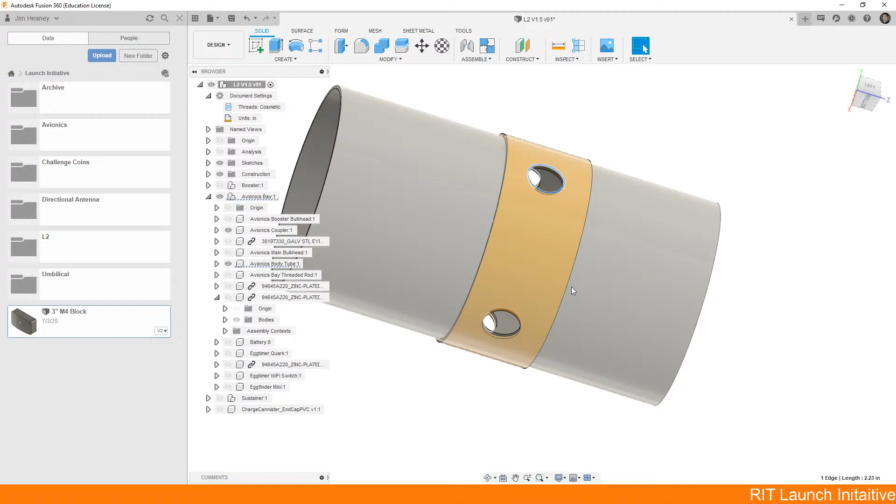The challenge is we wanted to put a lot of cameras in this, so I needed to put 4 holes all the way around the Avionics Bay. Usually when you need holes for venting, you just drill a small hole somewhere, and it doesn't really matter where, so long as it's not right on top of your barometric sensors. For these camera holes, though, I needed to make sure the holes on the outside of the bay matched up with the positioning of the cameras inside, so these all needed to be done quite accurately.

The challenge is, how do you actually put them in there? The first thing I tried was using the laser cutter, holding the tube, laser cutting it, rotating it 90 degrees, laser cutting again, etc. The challenge with that is twofold. One, you can't laser cut blue tube very well — it likes to burn more than actually cut. The other downside is I didn't use a very good jig as I was rotating, and at the time we didn't have the 4th axis for the laser cutter in the construct.

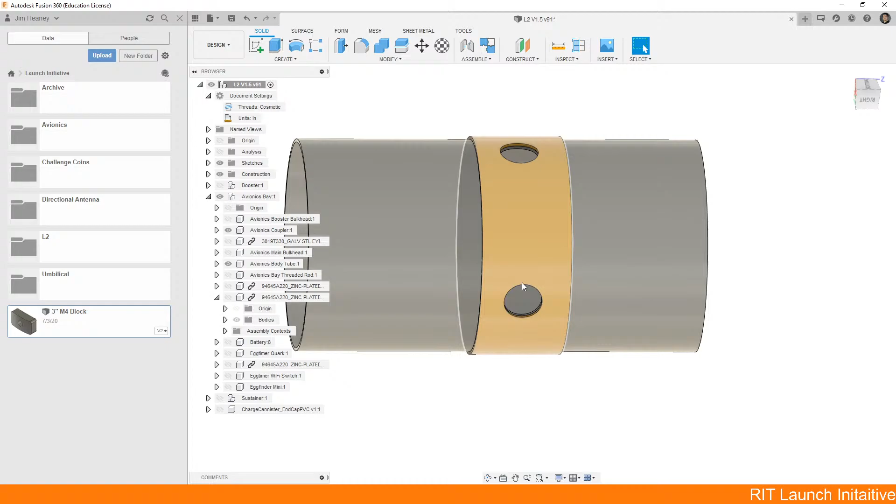So what ended up happening is this hole to this hole was maybe 86 degrees, then this hole to this hole was maybe 110 degrees, and this hole to this hole was maybe 80-something degrees. So when I put everything together, some of the cameras were dead on center, and some were sort of off to the side, a little bit weird.

You could try and drill them by hand. It's very tricky, obviously — there is some trickery you could do with string and some math about the diameter of this tube to very accurately mark out the center points of all these holes. So that would be an option.

Another very cheap, easy and simple way to do this would be, instead of trying to cut this part out of blue tube and then putting holes in it, I could just 3D print it. If I 3D print this part and slide it onto a coupler and glue it in place, without drilling any holes in the coupler, I now have a jig and a final part that tells me exactly where those holes need to be drilled. Then I can just match up a drill bit to that 3D printed part and drill a hole straight through the coupler.

I had also tried to manufacture lenses to increase the altitude of this rocket by reducing the drag around these holes. What I tried was taking an acrylic tube and making a piece of acrylic that would perfectly fit this — since it's the same diameter tube and the same thickness, it would just slot right in. Just like with the nose cone bulkhead, though, I ran into a lot of issues because things don't really go as well as they look in CAD. The parts would just fall right through.

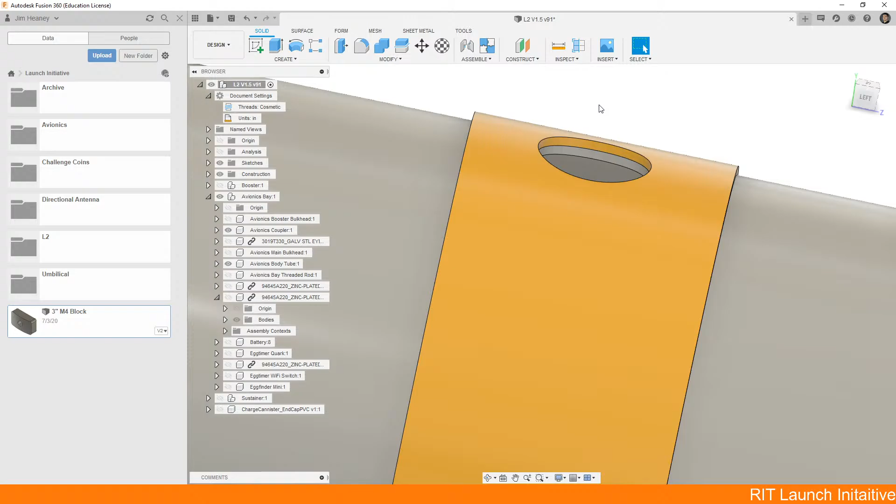I could have saved myself a lot of time and hassle by just making the hole in the coupler tube slightly smaller than the hole of the body tube itself. Then the lens could just sit flat on that lip, and I wouldn't have to worry about alignment. The downside is I'd need to manufacture this diameter hole down to a flange, and then a different diameter hole all the way through, which can be tricky.

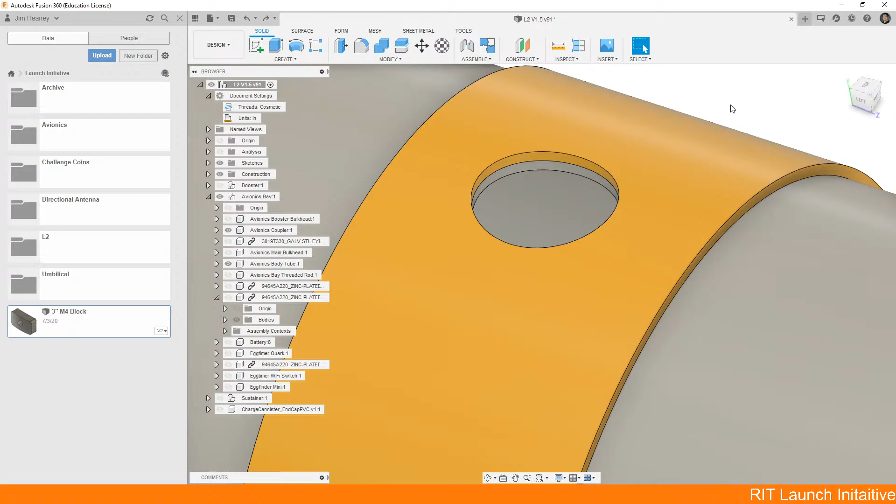So now that we got that out of the way, that's pretty much all there is to the Avionics Bay. Obviously there's a lot of improvement that can be done there, and I'm going to go through and change a lot of stuff in a future video to review some new practices and techniques for designing specifically for 3D printing. For now, let's move on to the booster.

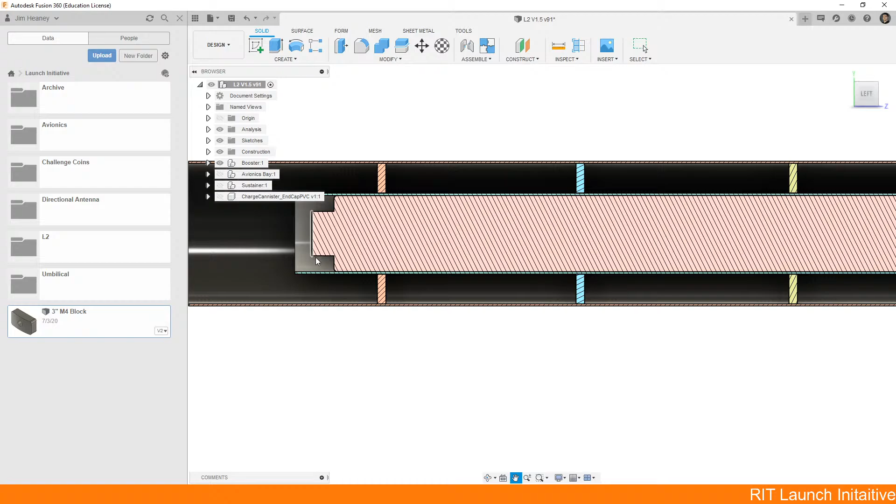So the booster is your run-of-the-mill, pretty standard booster. We have a center motor retainer tube, and a couple of wooden centering rings down the length. Those are just laser cut, and if they're a bit bent or misaligned, nobody really cares, because the tube in the center ensures the motor still fits either way.

Cesaroni is really great, and so is Aerotech, with providing accurate CAD models of their motors, so designing is super easy. Let's go ahead and hide the motor casing. There we go.

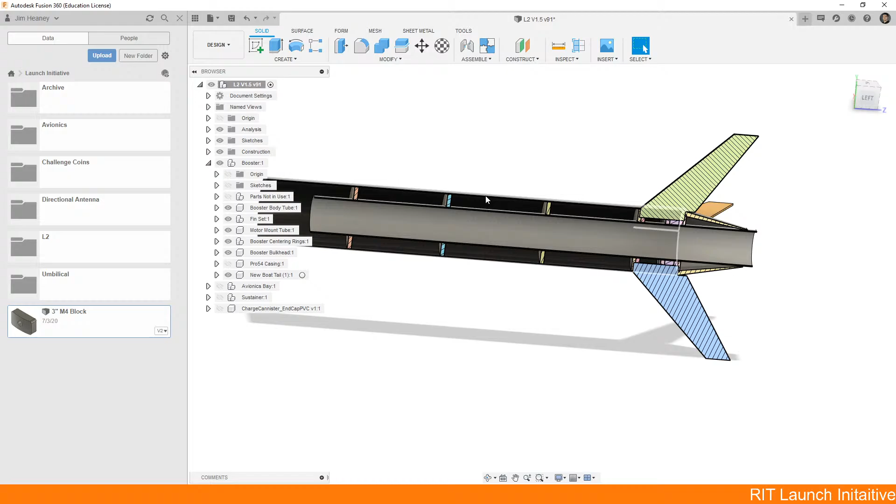So down here in the booster, and in a lot of rocketry boosters, it's very much a permanent assembly. You don't see much in the way of nuts and bolts down here since you have very little space and a lot of forces. Generally just slathering everything in epoxy and calling it a day is a much easier approach. So you see this center tube can never come out - it's glued in there. All that's glued.

The fins are on a tab, and they're all glued. As for the boat tail - at first I had a boat tail... here we go, where is it... there we go, so I hid the new boat tail, and that, and that, there we go. So I originally had a boat tail that was actually bolted on that could double as the motor retainer. Let's take a look at this part.

Now, the obvious issue with this part is that it is right below the motor, so it needs to be able to withstand the exhaust heat and pressure, as well as being strong enough to retain the motor during the shock forces of deployment. Now some people - and I've done a lot of research now - it seems that you can get away with a high-strength 3D printed part for this application.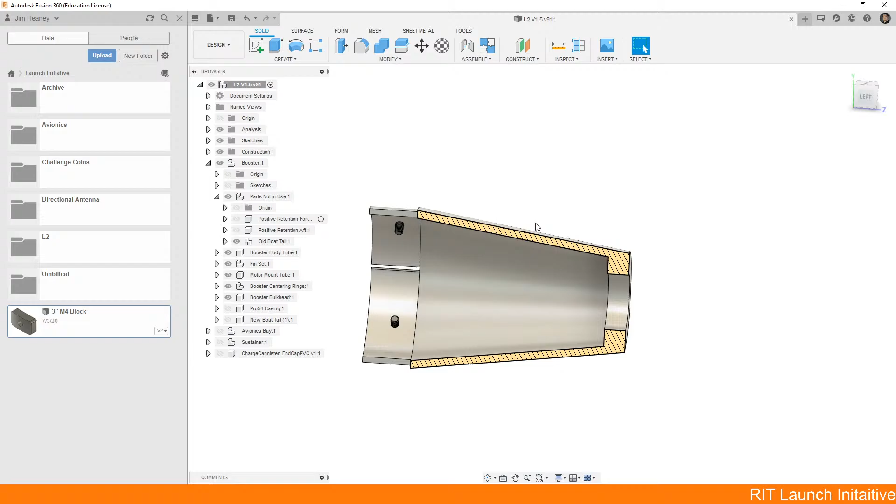But I had it in my mind that plastic equals bad, metal equals good, which is a mindset that a lot of designers will fall into. So I made the poor folks in the shop machine this abomination of a part out of a solid billet of aluminum. I don't know how long it took them - it was a week between when I submitted and picked it up - but I feel awful for the kind of work they had to go through to get this part.

If you just look at it, I started with a solid billet, so they had to go in and core out all of this material one pass at a time with a drill, then increasingly finer and deeper boring bars to get the final part. Then I didn't really give them anywhere to hold on to - all you have are these very thin flat faces, and even then they have cuts in them, so you can't really clamp onto them very tightly. So they had to do this entire long stick-out part just using whatever very light depth-to-cut tools they had, while holding on all the way back here.

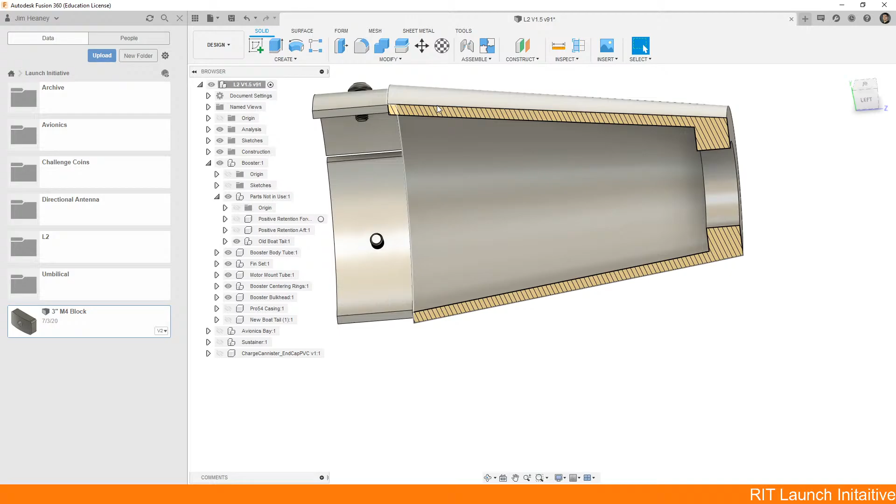Then on top of that, I gave them these sections here for the clearance on the fins, which needed to be a square base to fit the fin, which obviously is impossible to do. I don't even know how they did it - I think they went in with a file and actually filed it flat.

If I wanted to do them a favor with this part, what I would have done is extended the slot down so it's beyond the base of the fin, and then round it out so they can just go in from the side with an end mill.

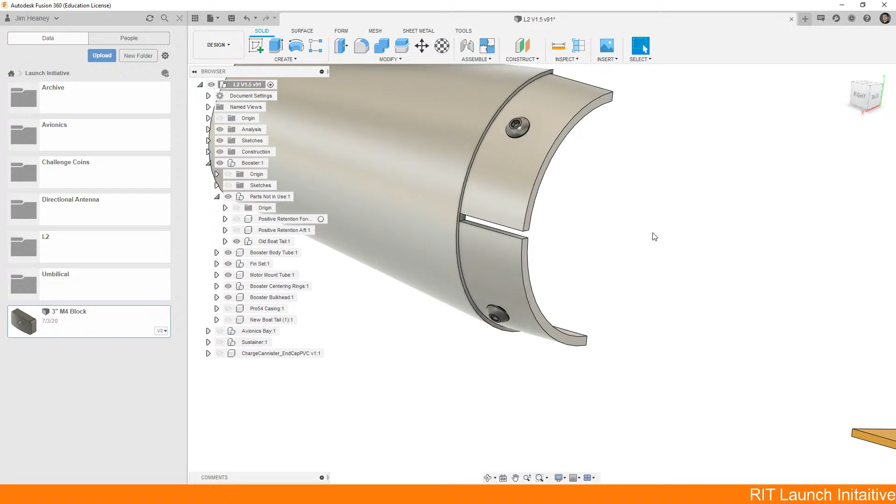It's also a challenge that these slots need to be located 120 degrees around the top of the part, so they had to locate this part centrally around a fourth axis, then rotate it and machine each of those features in, along with bolt holes that need to be spaced evenly around the outside and then threaded as well. So overall, this is a terrible, terrible part, and I feel bad for forcing people to manufacture this. Let's take a look at the new approach instead.

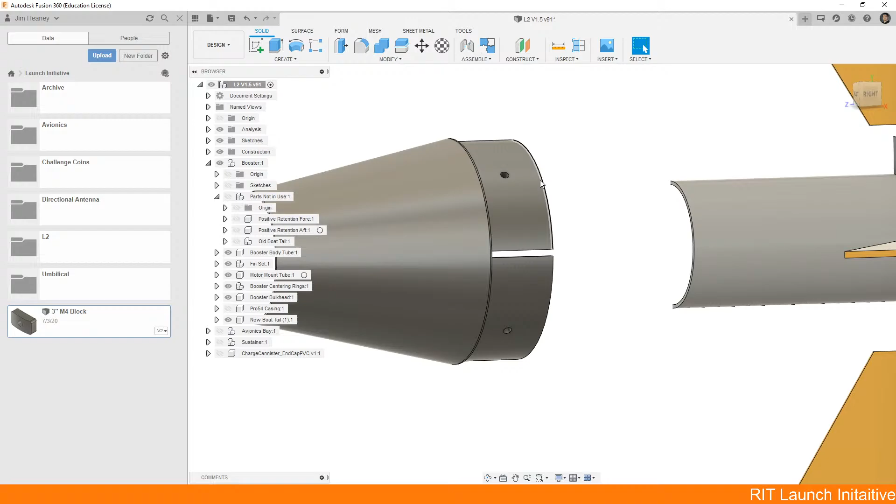So the new boat tail I settled on was 3D printed. This one doesn't retain the motor, so I had to go for an alternative motor retention practice, which is not the end of the world. The benefit is this part I can make in 12 hours on any 3D printer, and it works just fine. Had to print it out of PET to get the strength and heat resistance I needed, but overall it's a much simpler part.

I could lay this flat face down on the bed. There'd be a tiny bit of support material on this lip here and on the base of the fin slots, but other than that, it was all good.

Challenge is, just like with the bulkheads for the parachute bay, I didn't really take into account the tolerancing of the tube. So what ended up happening was this was way too big and it started to splay the tube base outwards. So I had to go in and file it down, and if you go and look at this rocket today in the College of Engineering, the base of it is really ugly.

All that filing and sanding and trying to get this part to fit rather than just remaking the part, admitting defeat, I ended up with just a mess of glue and epoxy and filler, and it just doesn't look good.

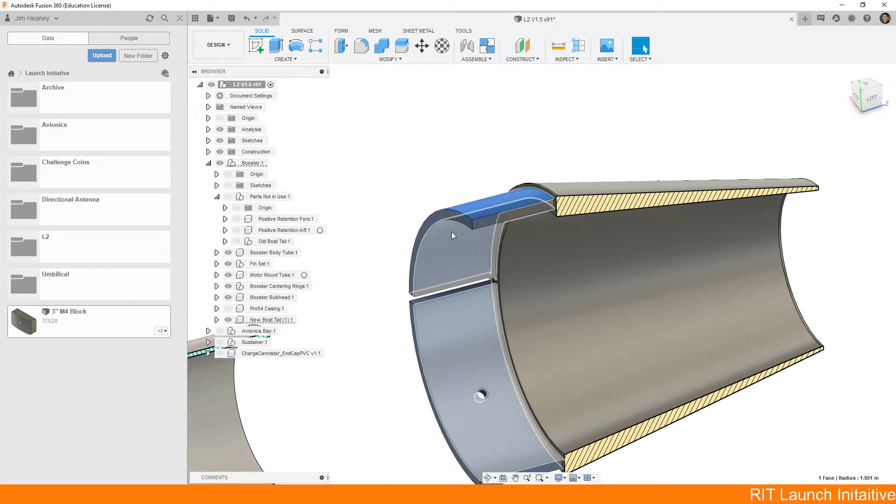If I had it my way, I would honestly just completely redo the booster. Not even from a DFMA standpoint, but just from a build quality standpoint. There's so many small tweaks I can make that would make the assembly process much cleaner and easier, as well as just making the entire thing look better at the end of the day, which is really important if you think about it.

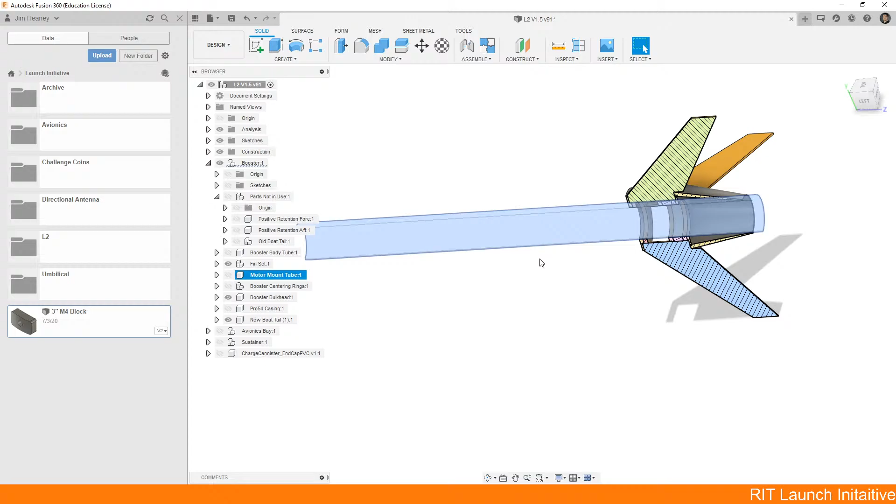So moving on, one of the things I'm really proud about is this fin retention. Let me hide the body tube, which by the way is just a tube, cut to length, can't get much simpler than that. We'll hide the centering rings, we'll hide the motor mount tube, and we'll keep the boat tail.

So this was a great design, and I love it, and I'm going to use it on a lot of my future rockets as well.

So the fins on this rocket are not only very long and very thin, but they're also swept. So I already have most things working against me when it comes to a fin flutter loading case. So just doing a normal through tube tab with these fins would not have worked.

So I needed a way to solidly secure the fins inside the body tube, but at the same time it had to be a stack of parts that I could press in from the back, since the motor mount tube would already be centrally mounted inside the airframe at this point.

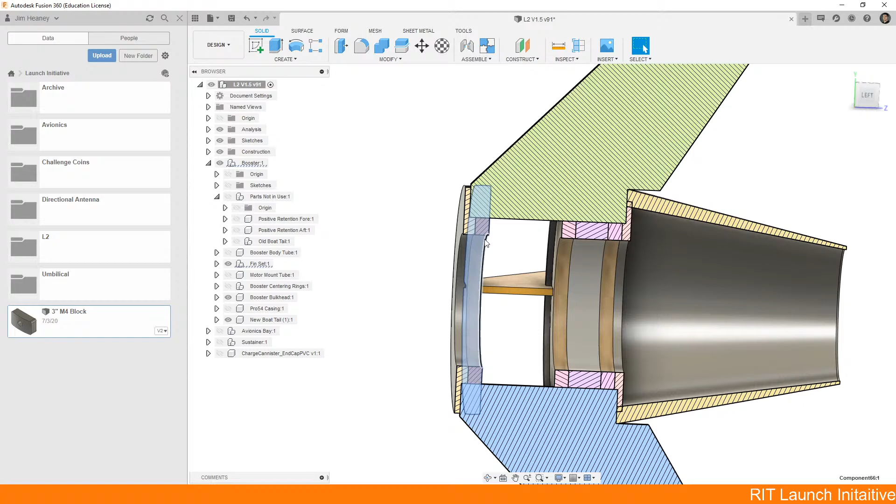So what I settled on was a series of 3D printed and laser cut wood parts. These 3 wood parts here are just a centering ring with slots cut for the fins. And again, to the point of reusing parts, they're all identical. That would clamp on around the fin with friction and a little bit of epoxy.

Then, on the top and bottom of this stack, I had 3D printed parts with a flange that would retain the front and back of the fin. The back of the fin is also held by this flange of the boat tail. So we have a lot of clamping force using very simple, easy to manufacture parts, that helped us get better performance out of these fins without sacrificing altitude.

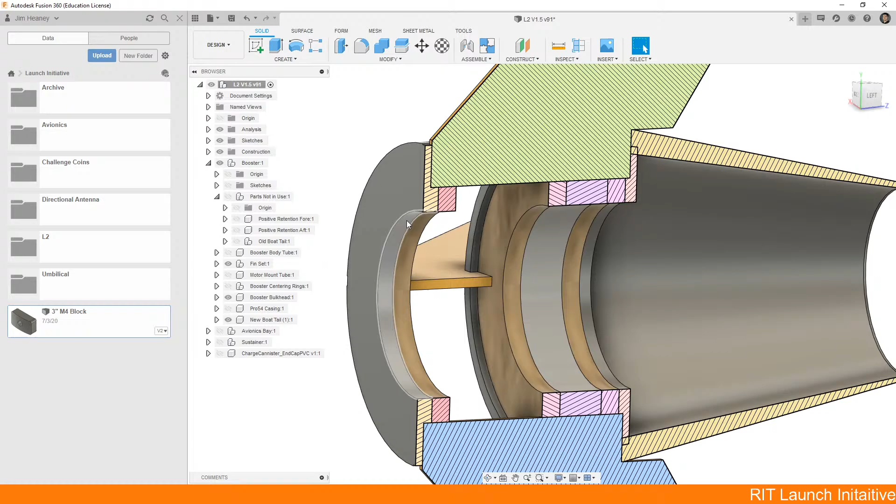Now the fins themselves, if I turn off analysis, you can't see under the paint job, but these are carbon fiber fins. Carbon fiber is a common material for fins since, especially at higher flight speeds, you're going to have so much flutter that anything else will just shred.

Now, manufacturing carbon fiber at RIT is a little bit tricky. It's incredibly easy to cut it on a bandsaw, and there are bandsaws especially made at RIT for cutting carbon fiber. But any machining is next to impossible. It takes so much setup time, safety precautions, specialized tooling. It's just not worth it. So, really, just keeping to simple straight lines that you can cut by hand on a bandsaw is the best approach for the fins.

What I did to get these fins cut out is I had my plate of carbon fiber that was, I think, 12 inch by 12 inch, and I printed out a 1:1 scale drawing of all my fins, then glued them down on top of the carbon fiber. Then at the bandsaw, I could just cut along the lines on the paper, and it would cut the carbon fiber underneath as well.

If I had to do it again, I might cut the carbon fiber into 4 quarters, secure all those 4 together with the paper on top, and cut all 4 fins at once. I'm not really sure if the bandsaw can handle that thick of a cut at once, but the upside is it would cut the machining time down by a factor of 4, and all the fins would be identical to each other.

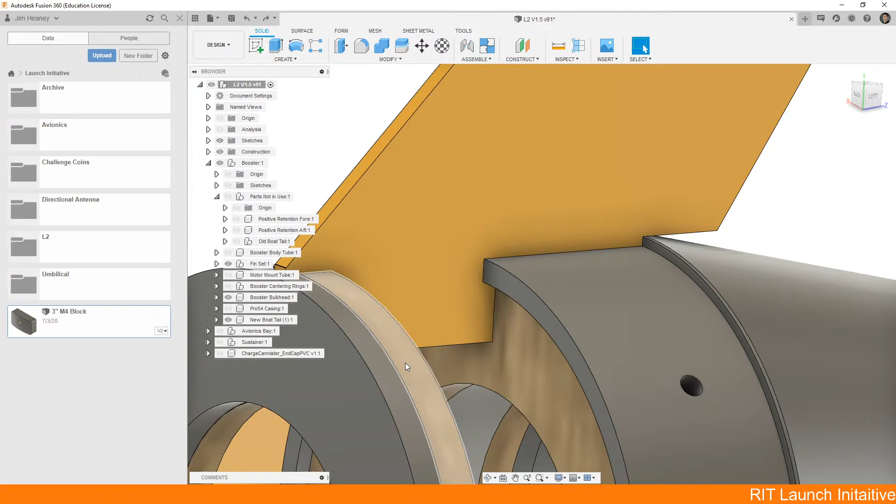Securing the fins, I do wish I left myself more tolerance between all these parts for the glue. These are a very snug fit, and the downside is most glue has something called meniscus diameter, I think. What that refers to is epoxies can flow freely like a liquid, but they can't flow through a sealed surface. It might need a 10 thou gap between the two, maybe 20, 30, or 40 thou, for that epoxy to be able to freely flow in and create a solid bond.

There are even some specialized epoxies and glues, like I think it's Loctite 504, designed so it can go between parts that are only a thou or 5/10,000ths of an inch apart and get a good bond between them. Of course, that stuff is very expensive. It's best to just use your traditional 2-part epoxy and take the hit of having to properly tolerance everything.

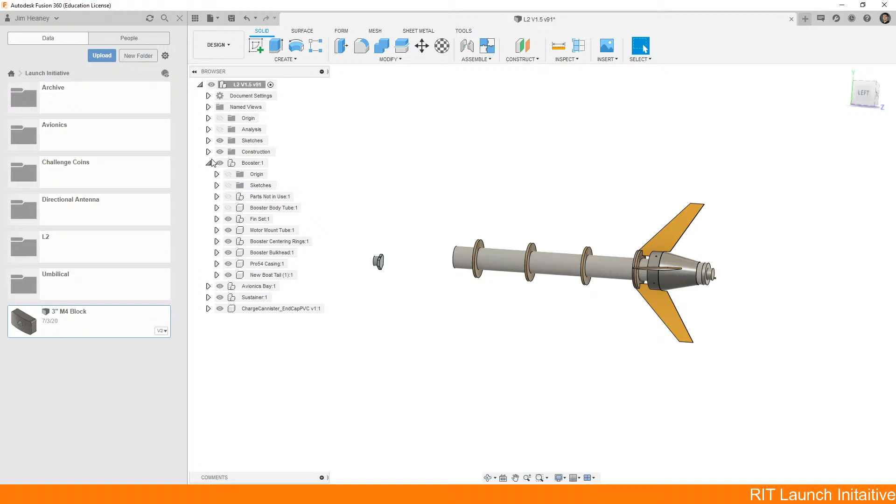So, all in all, it's not a completely failed design, but there's definitely a lot of things that I would fix or do differently going forward. I might even go as far as to redo certain parts of this rocket before it actually flies. Like we said, that whole Avionics Bay I can massively improve, and I can do some improvements to the booster down below as well. But for the most part, this is a rocket and a design that I am happy with, and it will serve the purpose that I need it to.

Make sure to stay tuned for future videos where we will go through how to actually design all the internal parts for this, as well as some more example design parts for how we can further improve this rocket.

Hopefully you guys learned some interesting new techniques from DFMA today, and I hope that in the future you will go through your past designs and see how you can improve, or how you even have improved as a designer. Before we finish up today, are there any questions from the chat related to DFMA?